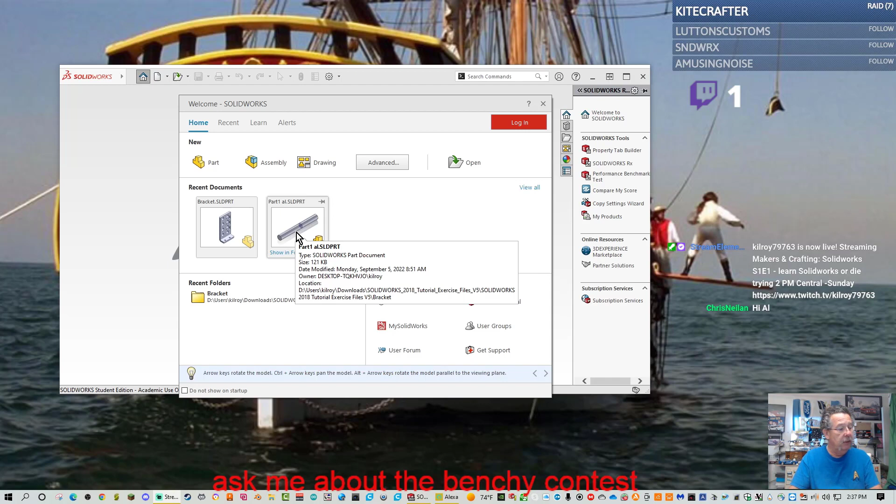So basically, we're going to figure out how to use SolidWorks. The first thing I have to do is type SolidWorks in the search window. Now I've got this one up, so I'm going to close it. I have a shortcut down in the taskbar - let's see, where is it? Somewhere down in here. There it is. I have right here in the taskbar a shortcut to it. But it says to, I guess if we put SolidWorks in there - hey, look at that. Solid. Now I'm going to enter, and boom, boom, boom, it comes up. So here we are, that's the first part there.

I have a secondary drink also. No alcohol, none needed.

So once we do that, there comes the SolidWorks. So SolidWorks application basically is what it's calling it. The Home tab - let me maximize this. Oh no, it goes away.

Oh, where is it? Did it go away? Yes. No, there's Alexa - we gotta get rid of Alexa. Oh, Alexa went away. Interesting, let me try that again. Let me close this out.

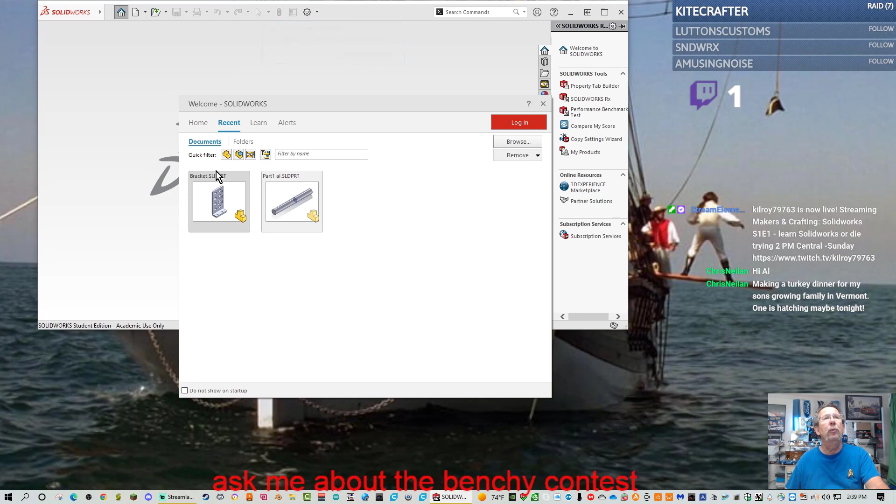Let's go ahead and open it back up, because that recent documents thing comes up, and I'm going to click on the advanced tab, which is what it's wanting me to do. So this is the home tab. It said click here, and then there's the recent tabs, which is what I've worked on - I messed around with the bracket and started the part. And then there's the Learn tab, which gives you a bunch of different introductions to SolidWorks, tutorials, my SolidWorks, etc. It's just some good information there.

Back at the home position, oh, and I guess there's an alerts section also here that gives different alerts for updates available, down August 16th, 15th. I believe I was told not to install these updates, so we're not going to install them. I'm going to close this out, do this, pin it.

So click new from the start menu. There's new right there, a new part. And do it there. If I click advanced, I think it shows it in a different way. And there we can actually go to templates and stuff, but where's new here? The templates, previews, I guess we could probably just go to new.

Oh, if we close it, we go back. Okay, see, we go to advanced and we go to the templates. We cancel it and we come back to this non-advanced. We are going to do a part, which is right here. So I'm just going to click on part. I'm going to do a new part.

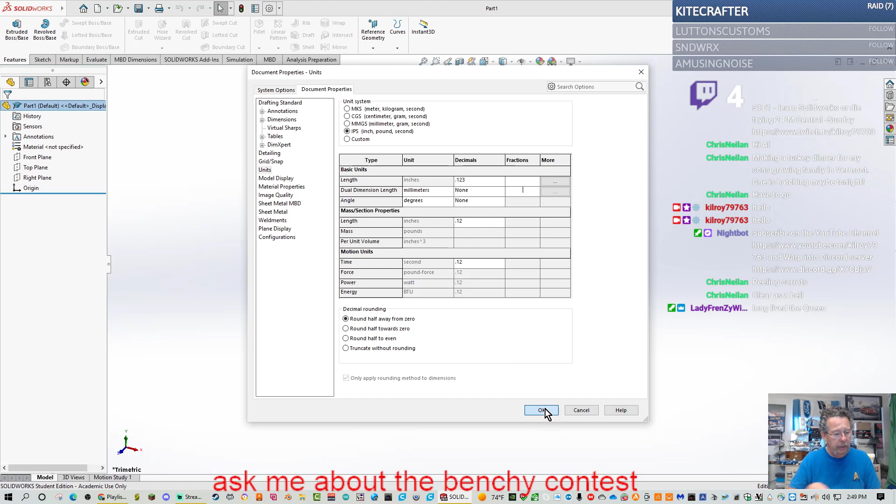Length basic, right, so select none for the angle decimal. Where's... oh, this one here says select none for angle decimal places. I'm going to select none on this. Okay, none, click OK from the document box. Okay, there we go, we're clicking OK. The parts feature manager is displayed. Parts feature manager, very good.

Create the base sketch for the extruded base feature. The base feature, to me, what they call a base feature in Fusion, I think they call it a sketch here because you got to click sketch. Anyway, it says to right click on the front plane, because if you go out here, see, there's the front plane, there's the top plane and the right plane. Those are the default planes. But it says to click on the front plane, so there we go.

I'm gonna make it a little bigger. I'm using the mouse to scroll it, and notice that if I go up here it moves down, if I go down here it moves up. I need it like... probably okay right there. All right, so that's kind of about how it looks in the book too.

So it says circle, let's see. The sketch tool is displayed, and it's wanting me to click sketch, which is... what is that? Too much buffering, really? Your phone?

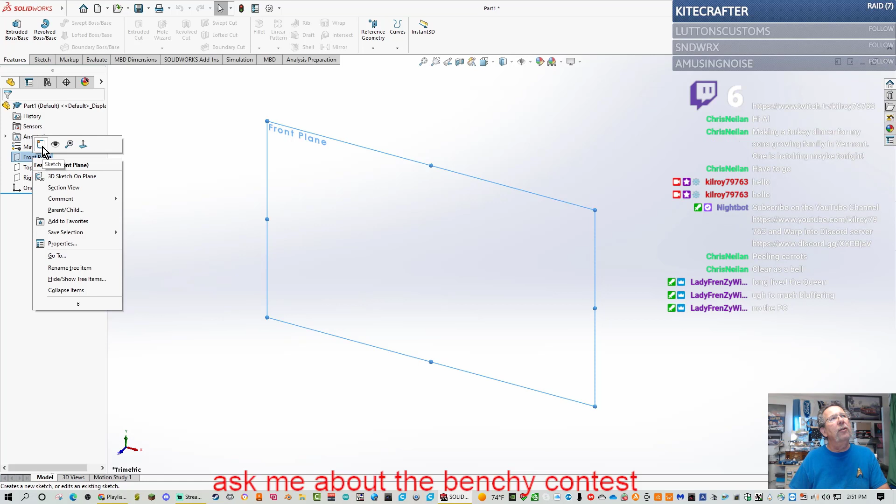So right here it says to right click and then go to sketch, which if you notice is right here. So when you right click, or when you select the plane, then you go straight to sketch there. There we go. Okay, so sketch on plane. Oh, it wants me to do the circle. Where's the circle now? There's the circle right up here, and it also comes down and says circle. So I have line, circle, line, rectangle, center point arc, ellipse, also text.

That's interesting, straight slot, and actually I like that.

Polygon and fillet, which rounds the corners, and then a point. So let's do circle, and drag the mouse pointer to the graphics window, which is over here. Then the cursor displays. You basically have a pencil, like draw and a circle.

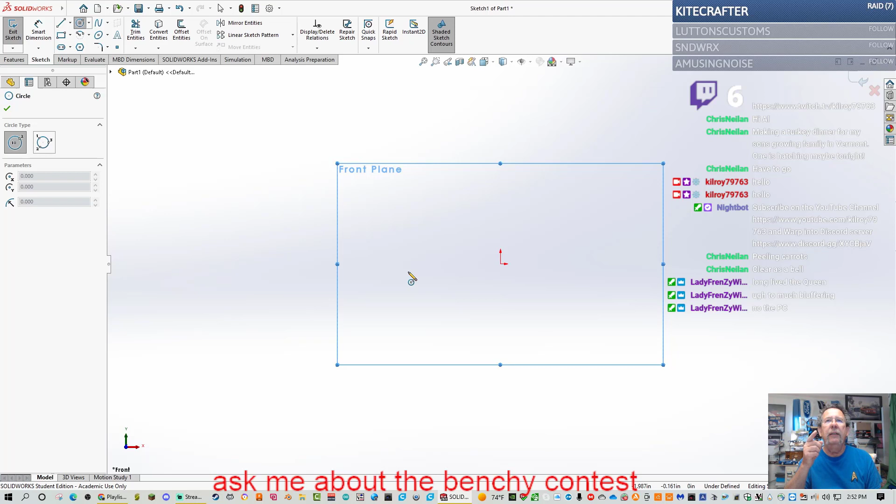So now I'm going to click the origin of the circle, and I'm not really understanding here. Drag the mouse pointer into the graphic window. The cursor displays the icon. Click the origin—it says the origin of the circle, but I don't have a circle yet. The cursor displays the coincident to point feedback symbol. I think what it wants is this.

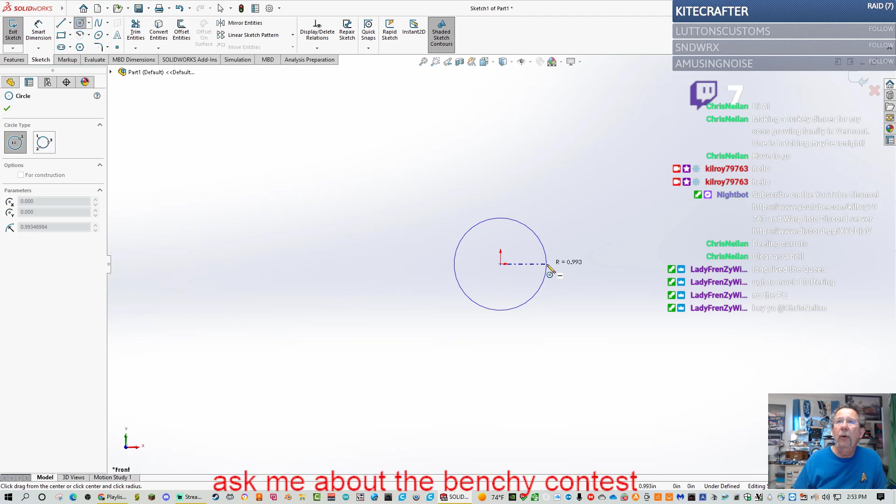Drag the mouse pointer to the right of the origin. I guess this is the origin here. It's not the origin of the circle, though—the origin creates the circle illustrated. Center point of the circle is positioned at the origin. Okay, somehow I just got confused there. It does show the origin, which looks like that.

So drag the mouse pointer to the origin, click the position to create the circle. The activated circle is displayed in blue. So if I click it, okay, the activated circle—I can just click it. We're good there. We have an activated circle.

It says add a dimension using the Smart Dimension tool. And the Smart Dimension tool, since I don't know where it's at, is up there somewhere. Let's see, where did it put it? Click Smart Dimension from the Sketch toolbar. Where is the Sketch toolbar? Oh look, I don't find the sketch toolbar, but I'm half blind.

I'm probably going to have to clean these up. Sketch toolbar—oh boy, where is this? Sketch—there's the sketch toolbar. There is Smart Dimension. There is the sketch toolbar.

So from cursor, click the circumference of the circle. So now I clicked it, and I'm going to click the circumference of the circle. That's diameter, so I guess this is the circumference, right? Circumference is the whole thing. So now where was I?

We put a dimension there, and it wants... yeah, that's why I said that. But see, radius is from here to here. Diameter is the outside—that's why when I click on diameter, look, it gives me the diameter, right? So before I get too carried away, click the circumference of the circle.

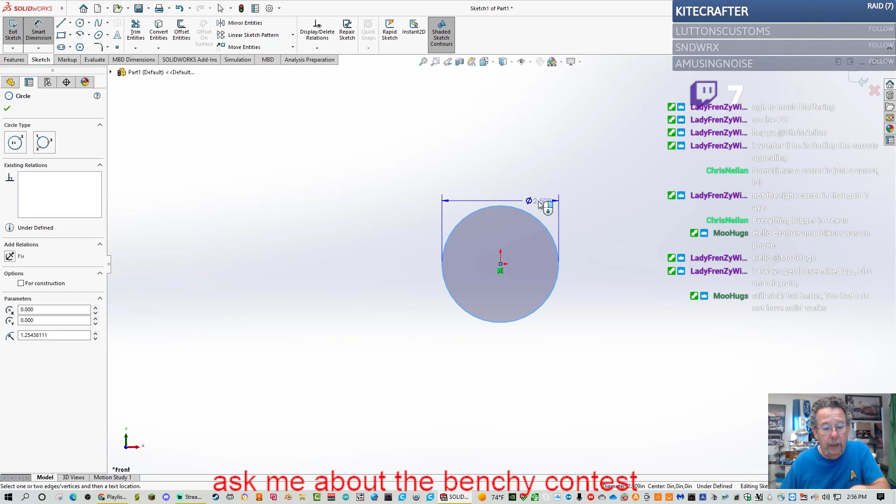It's $60, no, 60 or 99 bucks a year, I think. I don't remember exactly—of course I got this with the course, but that's one of the reasons I didn't use it. I think it's actually going to be better than Fusion, it seems to have a better, or less of, a learning curve.

Right now I'm just going through a lesson to learn how to use it and bringing up some of the features. So figured, what the heck, it's content.

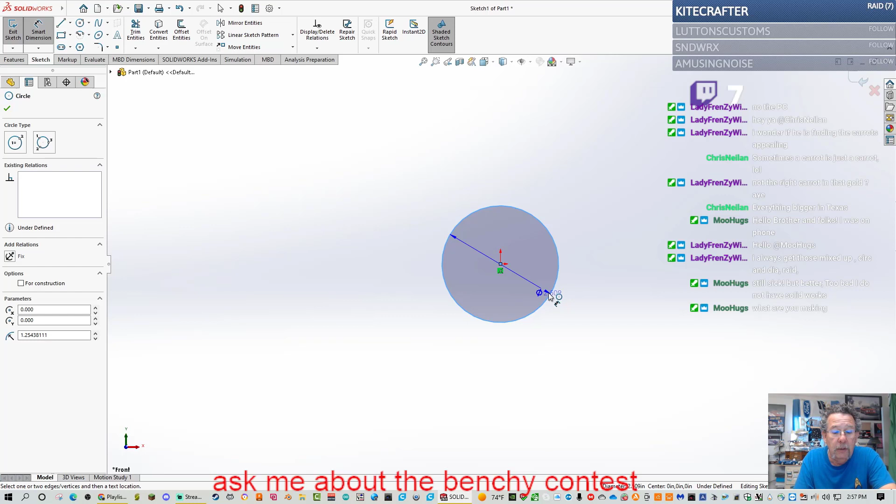So let me get back on track. Okay, I'm going to click the position diagonally above the circle in the graphics window, and I did. I'm going to click the position right there, and then drag it out. But why does it have the diameter? Is that what it's going to do? I thought, yeah, I guess so.

So click the position diagonally above the circle, enter 0.188 in the modify dialog box. Note the dimensions—where is the modify dialog box? Where is that at? Learn SolidWorks or die trying. No holes, exactly.

So I'm kind of sitting there going, I need to redimension this. There's a circle, there's the parameters. There's 1.25, 2.50. I wonder if this—yeah, this is. Check this out over here. This is a radius, see, it's like from the center point out, which is kind of interesting.

So that would change it, but here is where I don't know where this modify... again, oh there it is. Now what did I do? It says 0.188. Now see, this is inches, yeah that's right. 0.188.

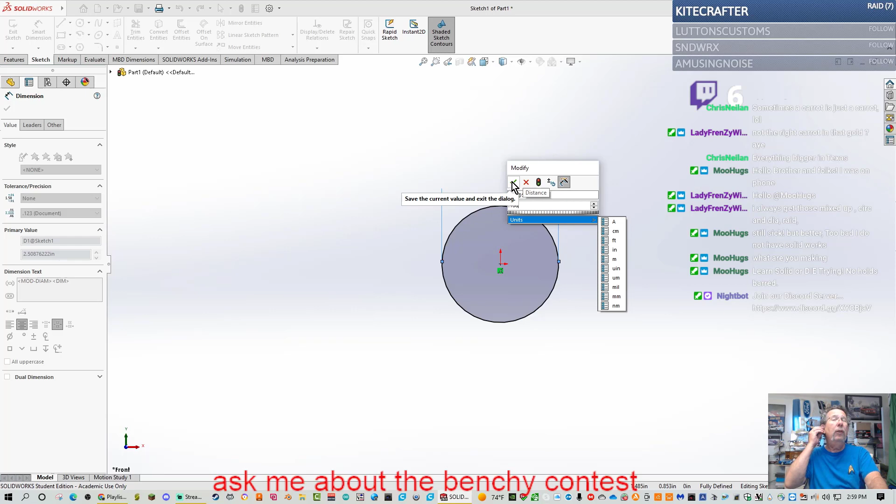Here, this is where I would need to enter 0.188. And then I guess units—there's units, these 0.18. Oh, I click the green check mark. That's one thing in this program that you do a lot: you click the green check mark to tell it, yay. Now this is still like this.

This is weird, the way it looks. If I go here, does it make this dimension driven off? Let's just cancel this—I'm going off script. That does not look right.

The circular sketch is centered at the origin. Press the F key to fit the part document to the graphics window. Right now it's centered in the origin, but if I hit F, it fits it to the screen, which is cool. And I have it highlighted.

Add relations and then dimensions. This keeps the user from having too many unnecessary dimensions. This also helps to show the design intent of the model. Dimension what geometry you intend to modify or adjust.

So primary units is IPS, which again is inch pound second. The secondary units is mmgs. So when you create a new part or assembly, the three default planes are the front, the right, and the top.

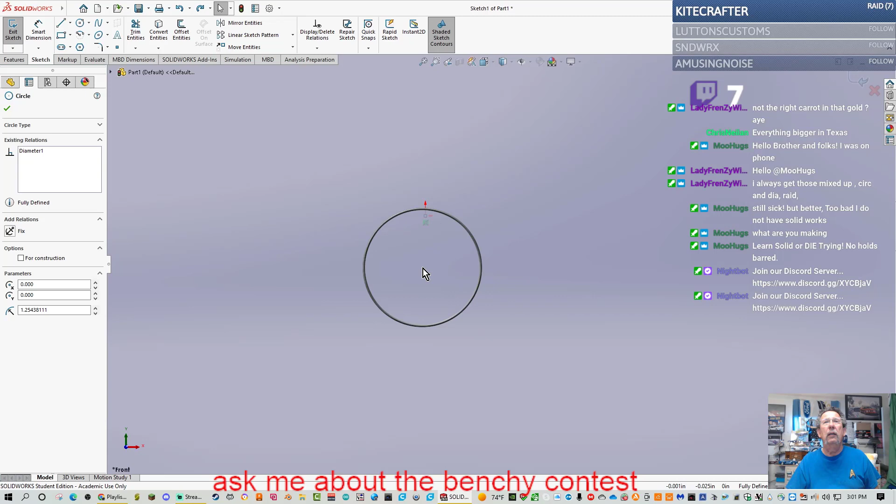This doesn't look like what's here, so I need to figure this out. I think I need to just go Control Z. Okay, so we're way out there. Hit this again. Oh, I'm hitting F, D4.

Let's go back to the mission. So click the smart dimension. I think this is what I did, guys. I didn't go down to the one that shows - which one is it? I did horizontal dimensions, vertical dimensions, dimensions. It doesn't say smart dimensions. Yeah, it does, but where's smart dimension? Ah, vertical, base, horizontal. Where is smart dimension? Oh no, that's what I just clicked.

Click smart dimension, the current display. So all I've got to do is just do that, and it displays this. Just did it a second ago. That one went there.

Click circumference of the circle. Oh, there it is. And then click the position diagonally above there. It doesn't really show this so much. Auto insert dimensions - here, this one's the one we're trying to do the smart dimension on. See, it's doing it weird.

It is mentholatum, let me give you a shot. See? There you go. All natural ingredients, smooth and coat, topical analgesic rub. And really what I used it for, or what I started using it for, was because I had a little cut mark right there at the tip of my nose, and I needed something to wipe my face. Nothing like a red shop towel.

So I'm just wondering, D1 at Sketch, you know, since this one's driven up here, and for some reason I don't think box selection... I don't see how to delete it. Let's select more dimension. Gives more dimensions. Redraw. Well, what I'm saying is that maybe if I get this one...

Oh, check this out, I bet - well, maybe not, no. If I right click on it, box selection mode - how do we select more dimensions? Pick entities, redraw. I click that. Because this is wrong - this is 2.509 and it's supposed to be 0.188.

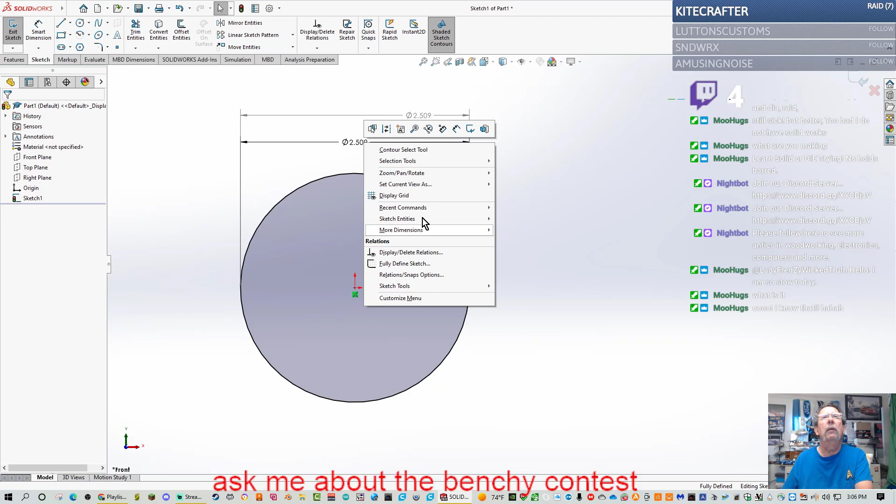Selection, display grid - very interesting. And I followed it just like I said. Enter the modify - note that the dimension modify. I don't see modify now. See, modify - what's something else that...

Let me look at this real quick. Tool, display, recent commands, display, delete - here's delete, let's do a delete. What I wanted, okay, do this. And let's delete this one too. I'm just right clicking on it.

So we're back to this - this is the coincident point of the origin with that. So coincident means that they're the same, or they coincide with each other. I'm sorry, they're not the same, but they're at the same point - the center of the circle and the origin.

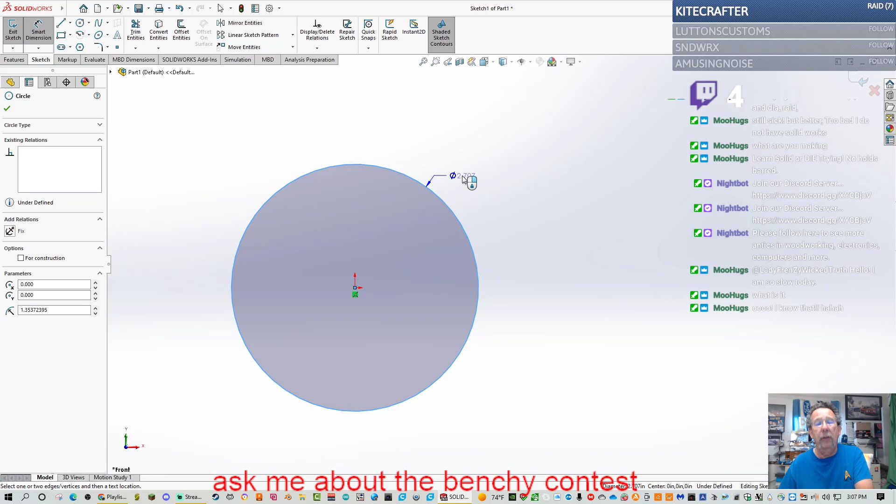Let's do this again. Let's go up here to Smart Dimensions. It has me point to that, and it has a little circle like that, identically, and when I click it, it goes like that, which I'm good with. If I right click... oh, I see why it moved. Okay, if I right click, I lock it. If I left click, it unlocks it.

And then that's when I get the D1 at sketch, and here's where I need to put the 0.188 units. The units come up, click the green mark. It doesn't say anything about units. The dimension locks down - click modify units. Oh, wait.

The dimension modify dialog box provides the ability to select a unit drop-down menu to directly modify units in a sketch or feature from the document properties. But it doesn't say anything about that.

Or does it? Click the green check mark in the modify dialog box. The diameter of the circle is 0.188 inches. So let's make sure we have inches, which is right there. Now let's go up and pick the X. Now it says point. There it is.

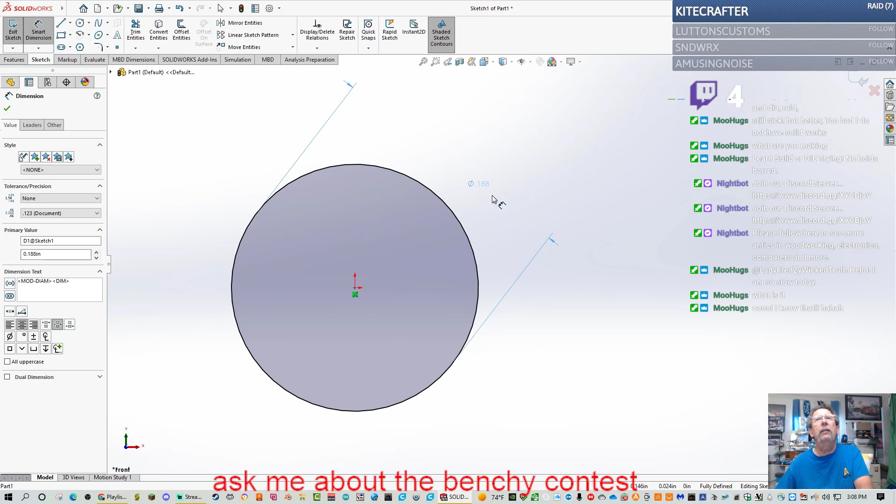Kind of weird, yes, it doesn't look like that. Move this thing. Cool that you can move it around like that. Okay, so the F key fits it, which is weird.

Press the F key to fit the part document. Interesting. Here it goes, it went whoop. So add relations, then dimension. This keeps the user from having too many unnecessary dimensions. This also helps to show the design intent of the model.

Primary units is IPS. The optional secondary units are provided in MMGS, but it's not provided in MMGS. I'm not certain why. I see units or more dimensions, so no, that goes to more dimensions.

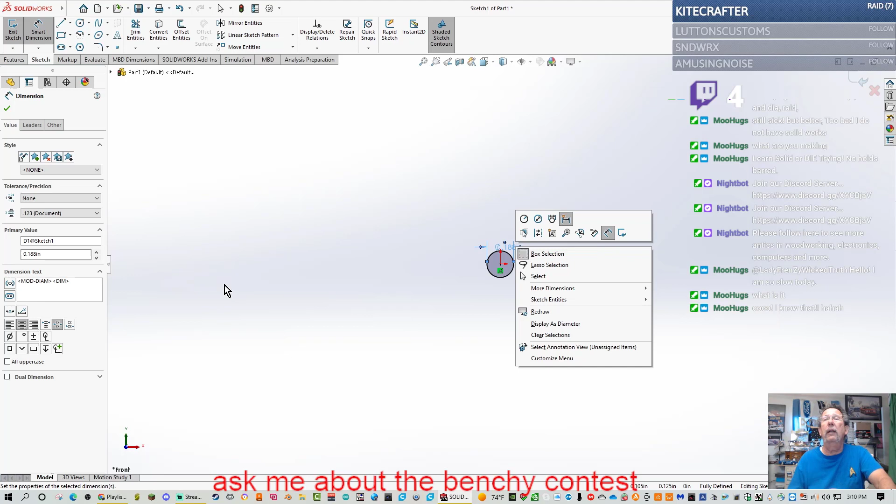All right, so extrude the sketch to create the base feature. Click the Features tab from the command. It is right there, there's our Features tab. Click the Extruded Boss Base Features tool.

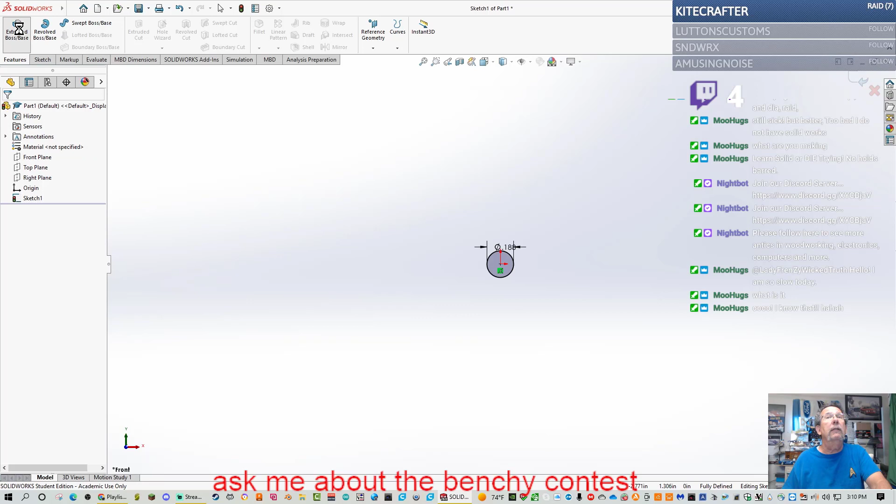The Boss Extrude Property Manager is displayed. Blind is the default end condition in direction 1. What does that mean? Okay, so extrude boss, right? Here we go, oh, check it out. Select midplane. Oh, where's midplane? Oh, blind. Blind is the direction, okay, that's what they're saying.

Blind is the direction. Click the Features tab, command, extrude features. Blind is so select midplane or endplane in direction one. So in direction one, see this is direction one, direction two, and then a thin feature. But at this point, what it wants us to do is go

midplane, so midplane is there. And what it does is it splits it so that when you pull it, I think it pulls... I remember the word, but it pulls equally in both ends, so it's mirrored or anyway, um, yeah, and that's what I just said.

Enter 1.375, comma 3493 for depth. Let's go here. Yeah, 1.375, and I think I could just... and then space, no, comma. Anyway, space, open box, 34.93, close box, not close box, but close square brackets.

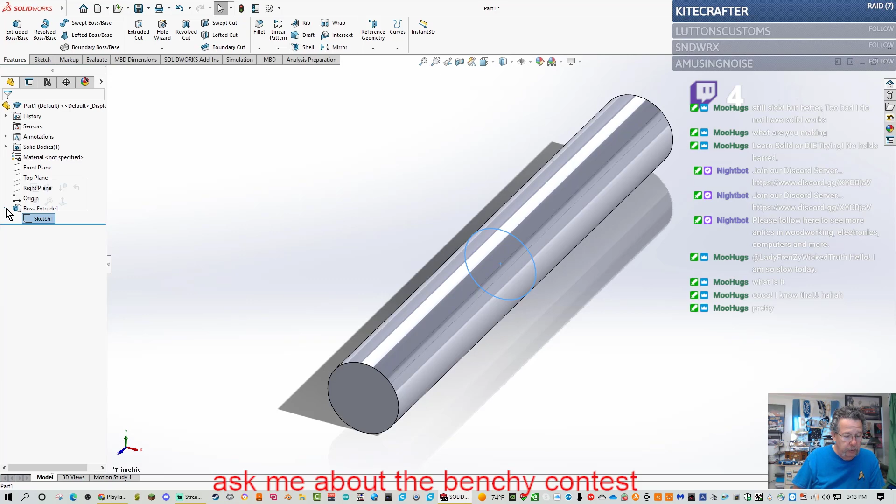Display an isometric view of the model. Press the space bar. So if we press the space bar, it shows us the orientation dialog box. And we're going to click isometric view, which is this. No, it was that one. See right there? That's what it wants. And that's what we have, a trimetric.

This over here is still showing hidden lines removed. Hidden lines visible, there's our hidden line. See how it showed it right there now? That's pretty neat.

And then this one, which is like a wireframe. So you really have, I think what it's wanting is the isometric view, that's shaded with edges. I think they might have changed that.

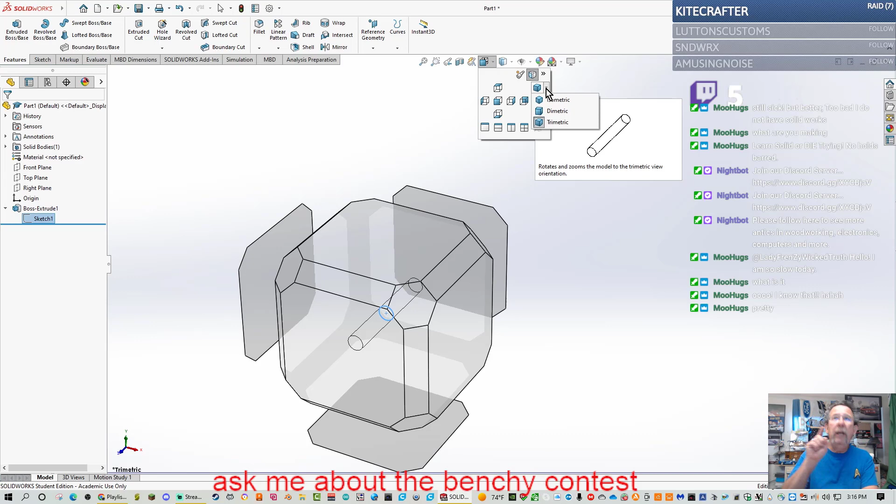Here's trimetric, or just click the isometric icon. The boss extruded name is displayed in the feature here. So we got isometric, dimetric, and trimetric. So it wants us to do the isometric. That's what it wants right there, even though that's not what it's showing right now either.

Click Save As from the drop-down menu. Now I was told it would be a really good idea to save to a thumb drive for later use. I'm going to have to do some calisthenics, get up underneath and plug it in the back because the front is full. So I'll be right back.

Whew! Man, I tell you. Well, I plugged in the thumb drive and lost the camera, but that's okay. I got it back. Make sure now that I can see the thumb drive.

I think that's it. All right, so let's see if I can save to you. So it says to save. I wonder if I do a Control S, but I don't know where it's saving to. So I'm going to do a Save As. I'm going to click there. There we go, so if you go up here to the floppy.

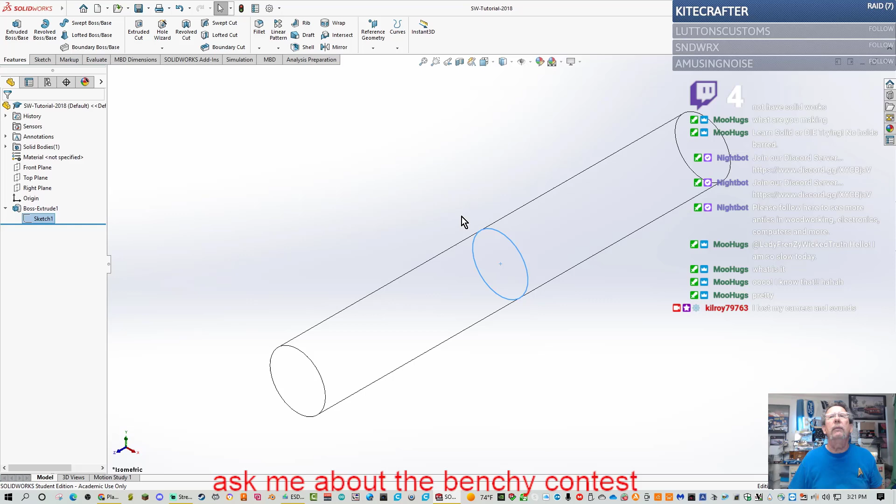Which means that I should have done it here, right? Back to that - I think that's how I should have saved it. So if I save it again, see, Control S is also save, so I'm just going to Control S and save it because that's what I'm seeing in the book, right? I'm sure that that's what it needs. Oh no, and it actually said to save it this way.

Save as, and then to make a folder, so I'm going to create a new folder. Yeah, that's what it said. Oh, I see, I named the part that - see the part right there? Now here's a little trick, guys. No, don't do that, don't do that. Here's a little trick - you click right there, you go into change the name, I guess, or rename. But you can copy that. And since I'm wanting to make - cancel it again because I just copied that name.

But if I go to File, Save As, now I can go up here and go New Folder, and I want to name the new folder that right there. And folder, double click on SW tutorial - I've already named it as that. The file name needs to be Axle. So what it's wanting to do is put it in that directory or folder and call it Axle. Is what it's doing - Axle. Oh, Axle. And then for the description, I don't see the description.

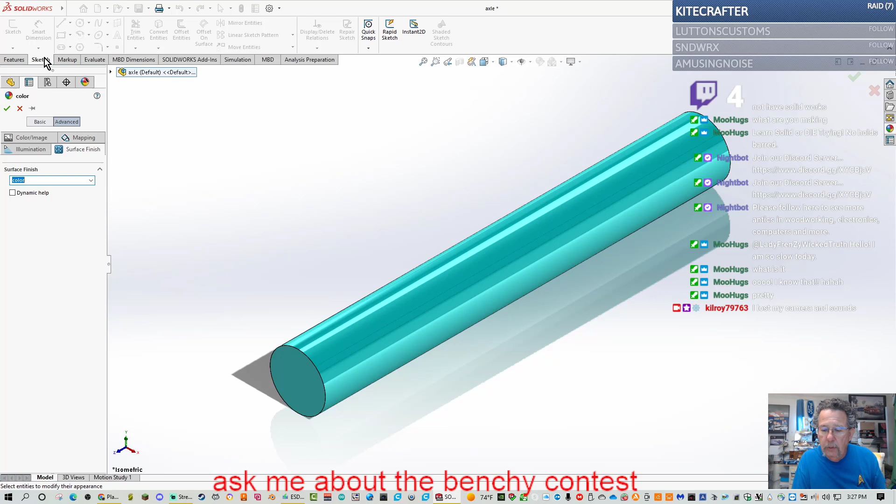Hello, Paul's Messai Workshop. How you doing, Paul?

A fully defined sketch has complete information, manufacturing and specifications or inspection, and is displayed in black.

I guess it's over there somewhere. Who knows? Because I just got lost. The Sketch Expert Property Manager sketch.

I think this is more informational at this point. Sketch Expert Property Manager provides the ability to diagnose an overdefined sketch to create a fully defined sketch. If you have an overdefined sketch, click Overdefined.

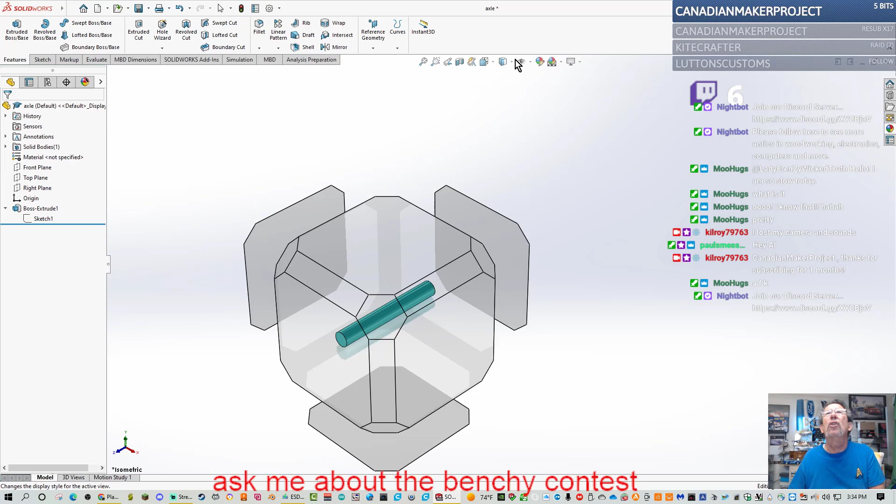Click the hide show origins from the menu bar. Hide show origins. Now let's go over here. Oops, no, this one. This one here. View orientation. And it's saying to go show the hide.

Front view, yeah, that's what I just did. That's exactly what it wanted. So let's put it on the isometric view now, which is I think everything, which is this one here. We go here and you can see it says isometric. There's isometric. So we're back in isometric view.

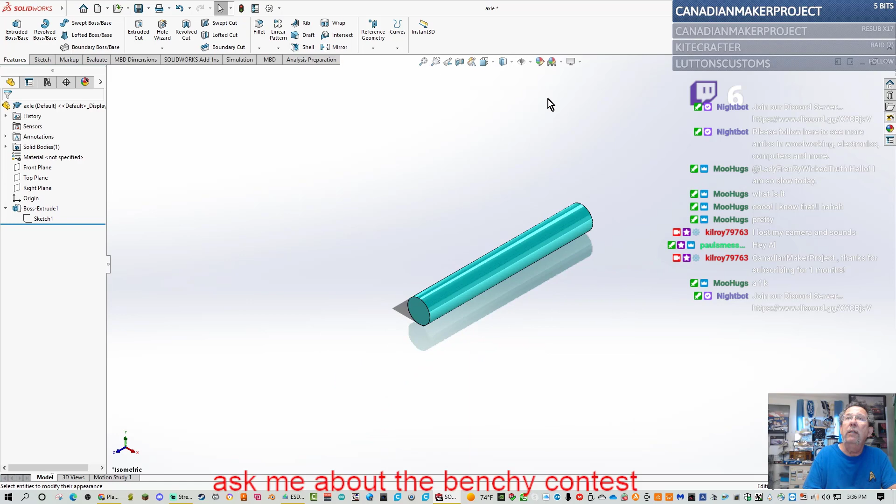So view the model. You can manipulate the model in the graphic window. You can press the lowercase z to zoom out, and you can press capital Z to zoom in too. So if I do Z Z Z Z Z, I go out, and then Z Z Z capital Z Z Z, I go in, which is kind of neat.

View the available tools in the graphic window. Right-click on the graphics window, select the available toolbar. So I can actually click here, and that toolbar is what it's telling us to do.

Project. First, I'm going to build it. Okay, well, that's the first step.

Click the middle mouse button, which is this. It's actually my mouse wheel. And look, there's an optical illusion right there, guys. I don't know if you can see that, but it looks like this part is smaller than that right there, and it's not.

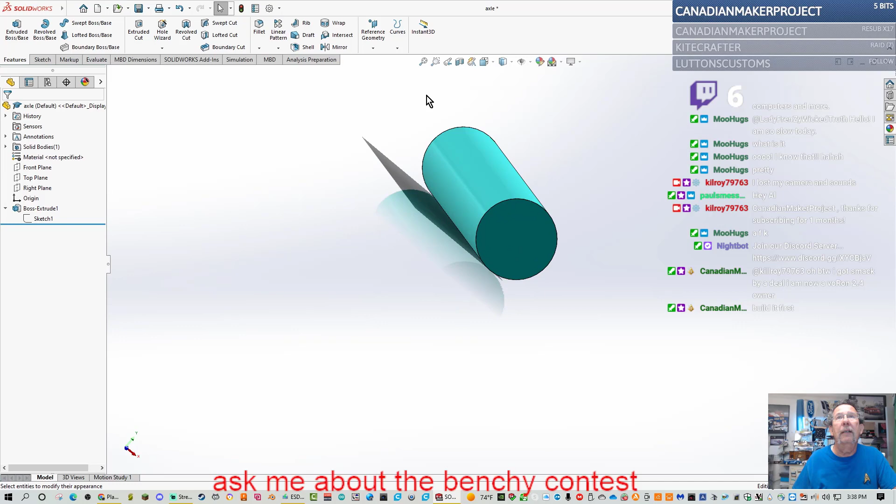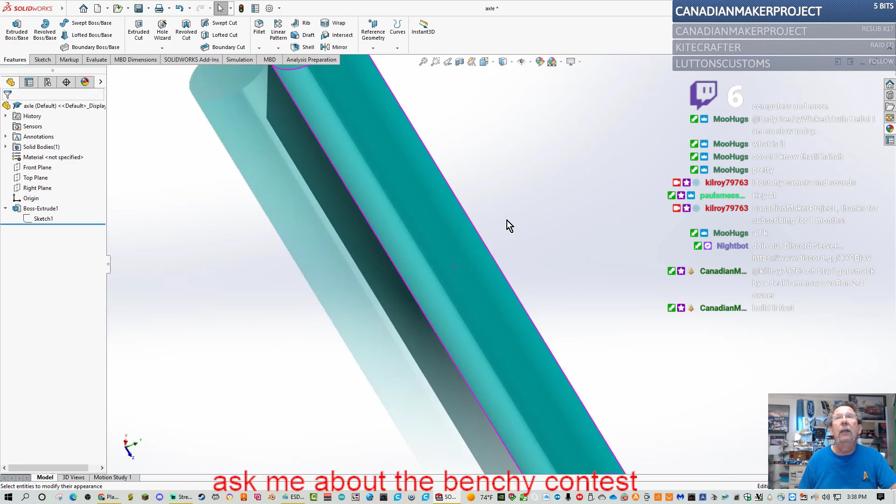So that middle mouse button, F, gets this out, right? So press the up arrow on your keyboard. Oh, look, and it rotates that way too. Here's the left and the right. Woo, woo, woo. That is cool. That is cool.

So the arrows do that, and it does it in 15-degree increments. So up arrow. I'm basically taking notes, right? 15-degree increments. View modes remain active until deactivated from the view toolbar or unchecked from the pop. Yeah, right. So if I hit F, it goes back out, so click isometric view from the heads up.

So let's click isometric view, the heads up. There we go. Isometric. There we go. Click the drop-down arrow in the display styles.

Where is display styles? Oh, I see the drop-down arrow. That display, there is display style. So what it's saying is click this little arrow, and the shaded displays are shaded view of the model.

The shaded with edges displays the shaded view of the models with edges. The hidden lines removes, yeah, I think we went over this before, removes only the model edges that can be seen, and then the hidden lines visible displays the edges and the hidden lines. Wireframe, of course, is a wireframe.

So return to shaded with edges, which I think is this shaded with edges. There we go. Where we're at. And then click save. The axle part is complete. Let's just click save.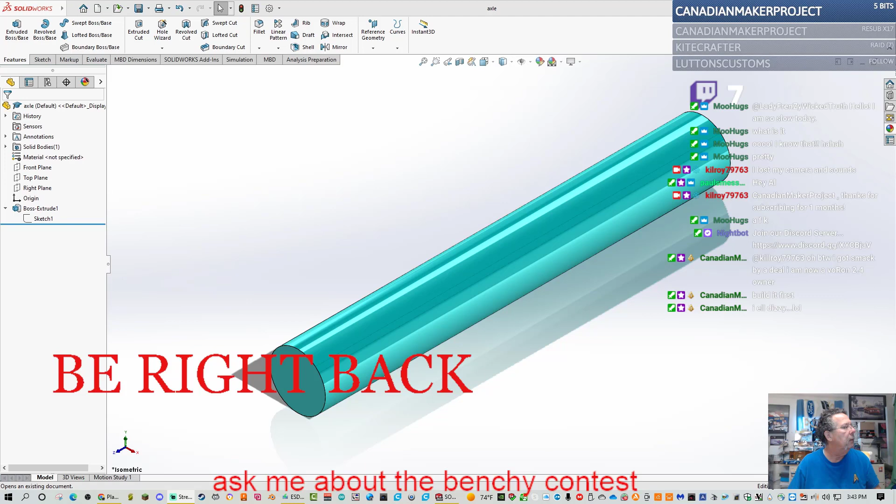Okay, we are back. All right, so now we're going to do the shaft collar part.

The shaft collar part is a hardened steel ring fastened to the axle part. Two shaft collar parts are used to position the two flat bar parts on the axle. What this will be is something like this. Anyway, I'll show you later as we get better. We're just going to do a donut thing, basically a circle with a hole in the center, that's all it is.

So, not to dwell on everything, let's go ahead and click New from the menu bar, which is this piece of paper looking thing. From the menu bar, click the Templates tab.

Oh, but we're going to have to be in advanced, right? Templates tab is right there. Part is the default template from SolidWorks. Double click Part. Right, so there we go.

So the part's feature manager is displayed. Voila. Click Save As in the drop down menu. So, File,

Save As, enter shaft collar for the file name, in the tutorial folder. Call it shaft-collar, shaft, dash, right? Click Save.

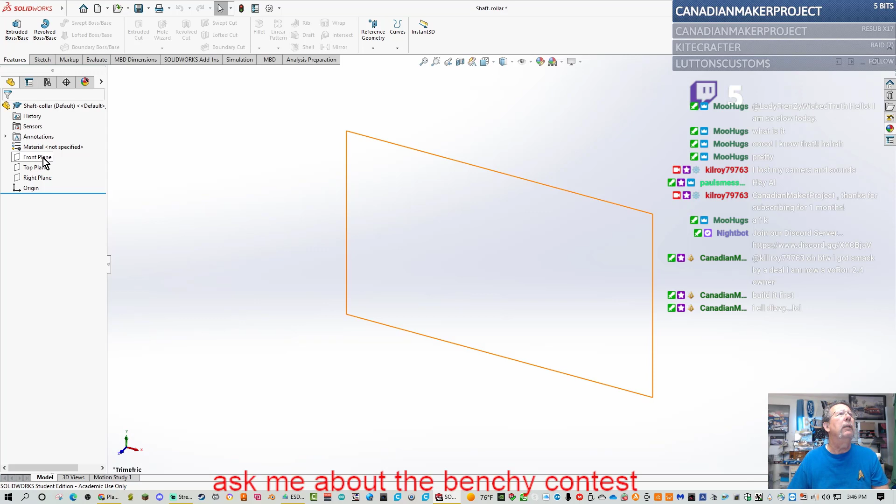Okay, so insert a new sketch from the extruded base feature. Click sketch from the context menu. Right click on the front plane. Oh, the front plane, yeah, that's why it wasn't there. Okay, so there we go on the front plane, and then it says click the sketch, which is right here.

Okay, so click circle in the tool box, which is right here. As we do that, we have a choice of a perimeter circle or just a regular circle. Regular circle is what it wants. Click the origin, which is right there, and it displays the coincident point feedback symbol.

Drag the mouse to the right of the origin as illustrated, to the right. Click a position to create a circle.

Click Smart Dimensions, which is there, I just can't see it, from the sketch toolbar, right there. Okay, from the sketch toolbar, click the circumference of the circle. The cursor displays the diameter feedback symbol for feedback.

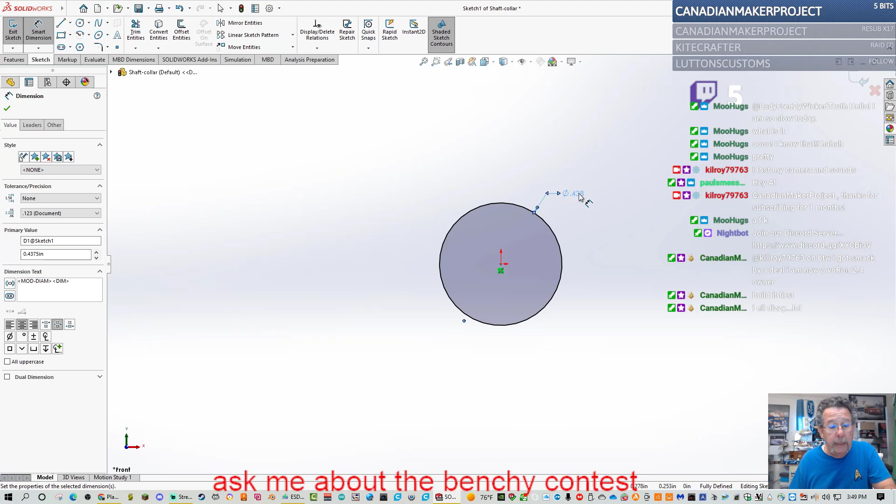Okay, now extrude the sketch to create a base feature. Click the Features tab, there we go. Click the Extrude Boss Base. Select mid plane for the end condition, so mid plane is what it is.

End condition in direction 1, yeah, mid plane end condition in 1. Enter a quarter of an inch, 0.250, right here. I wonder if it defaults for depth, and accept the default.

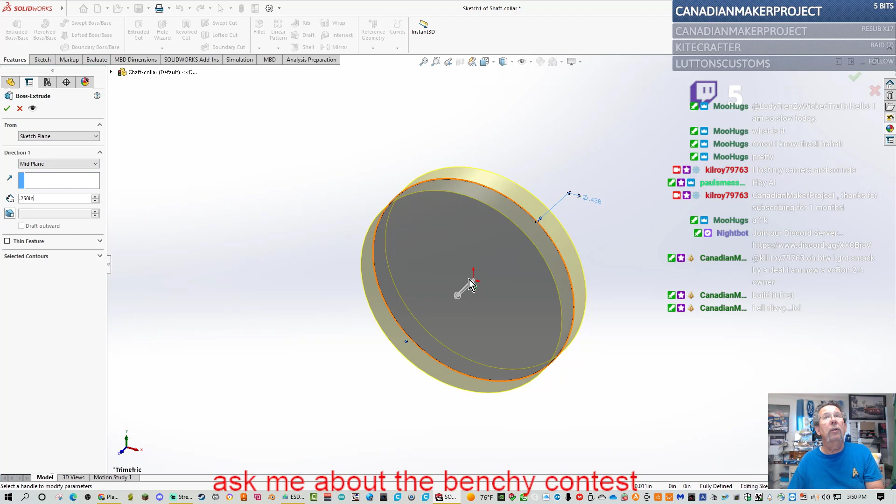Default conditions. View the location of the origin. Click OK. Here's the origin, and there's the quarter inch. Select that, press the F key. There we go, that's as big as it'll go.

Click trimetric from the heads up, so trimetric right here, we can go there. Oh, wait.

Hold up a sec. Oh, from there. Trimetric. There's trimetric. Okay, trimetric is there.

Click save the model. Click save.

Okay, so now insert a new sketch for the extruded cut feature. We're going to extrude another sketch. It says right click the front circular face of the boss. So let's go right click that. Right click on the front circular face of the Boss-Extrude1 feature for the sketch plane. Mouse pointer displays the face feedback icon.

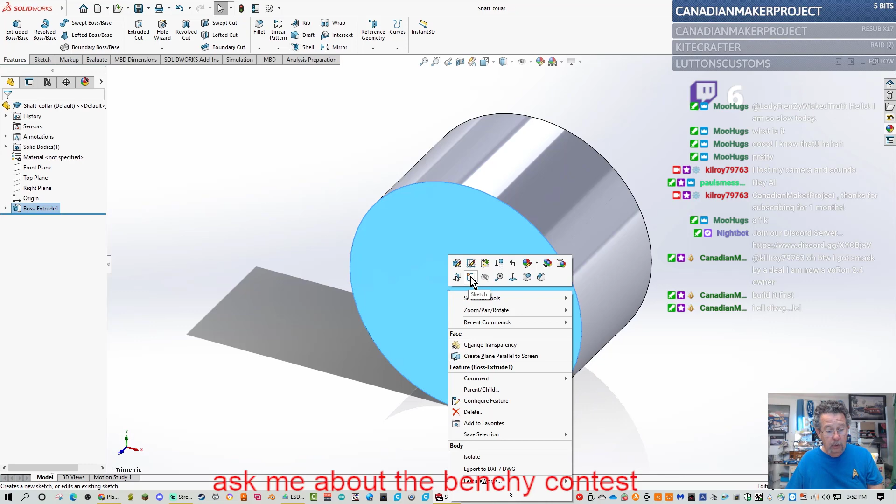It does, right? Which is all that you're seeing there. Click the sketch right here. From the context toolbar, as illustrated, the sketch toolbar is displayed. Okay, this is your sketch plane, and the sketch toolbar is displayed.

View the mouse pointer feedback icon for the correct geometry line. So wherever the mouse is, mouse pointer feedback icon. That's that here, or what?

But anyway, all right, the next thing is click hidden lines removed from the heads up view. From the heads up, that's right here, and that's right here. No, actually that's from right there. Lines visible, wireframe, lines removed. There's the lines removed.

Okay, click the circle tool from the sketch toolbar. The circle tool, which is this one. From the sketch toolbar, the circle property manager is displayed.

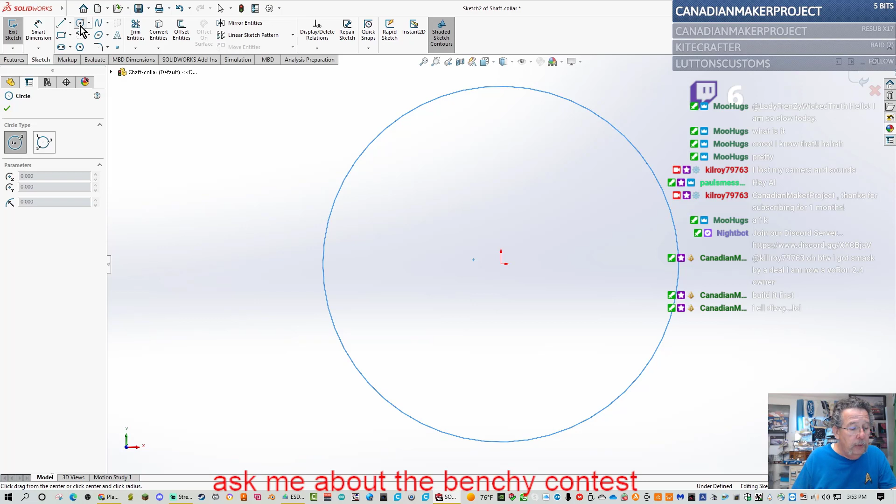Click the red origin, which is right here. See that? Why is that over there? Interesting. Looks like it's center, right, guys? So cursor displays a coincident point feedback.

Drag the mouse pointer to the right of the origin. Not going to go very far. Click the position to create the circle as illustrated, like that.

Okay, click the Smart Dimension icon tool, which is right here. Click the circumference of the circle. The circumference, again, is that there.

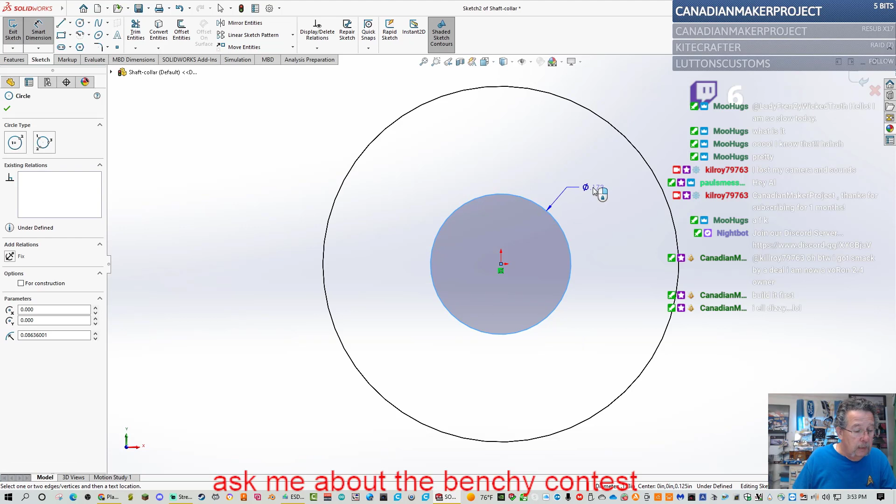Click position diagonal above the graphics window. There we go. Enter point 190 in the modified dialog box. Click the green check. Oh, okay, so there it is.

So insert an extruded cut feature. Click the Features tab from the command menu. Features, which is here. Click Extruded Cut. Extruded Cut is right there.

Select Through All. Where's Through All? Okay, in direction 1, Through All. See, that'll cut a hole right through the thing, right? Click OK.

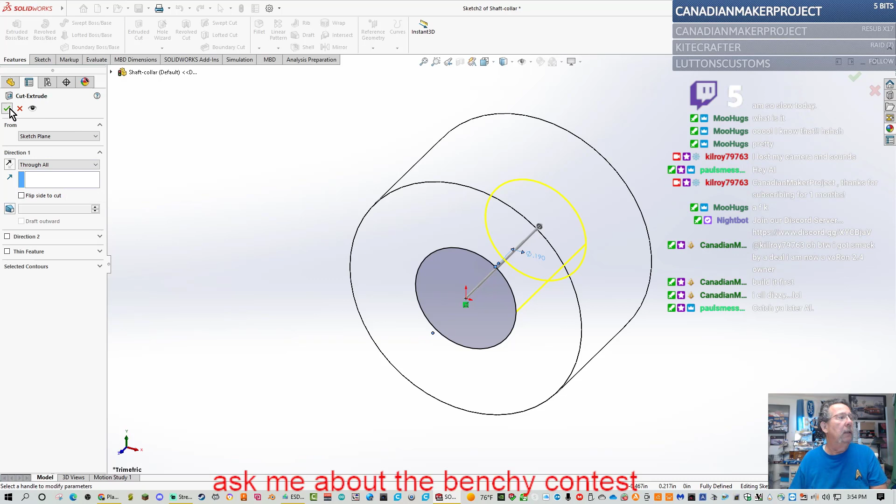See you later, Paul. Have a great evening and enjoy the rest of your weekend, Paul. Thank you for stopping by. I still have a little more homework, Paul, but it's all good. I'm probably not that far from finishing, but in any case I have to finish because this is due tomorrow. So, being a teacher myself, I know I better turn my homework in. That's all I gotta say. Anyway, this is going to be a good program, I think. Anyway, live long and prosper. See you later, Paul.

So we're there. Double click the... so let's see, click Z. Okay, so click Z, and that puts it somewhere, right?

Procrastinate, yes, yes. Actually it's been a busy weekend. We've been trying to install this stuff on campus, the software for Solidworks, and I got it installed here at home actually, and tried to install it on a laptop. It wouldn't install, so I just said this is going to be the next series. Who knows, I may even move this over to YouTube. But anyway, for right now it's on Twitch.

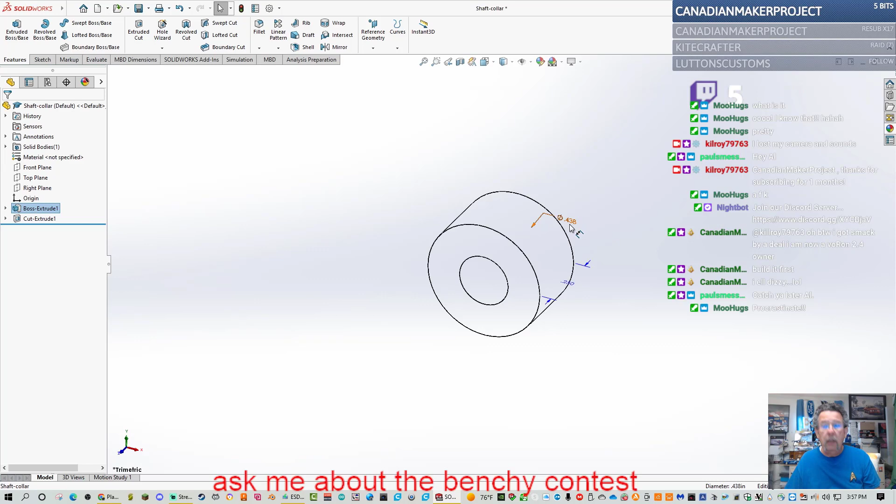Does it say 2.50? It says .438 actually. Oh, there's a 2.50, there it is. It is right there, there we go. So now do 0.500 in.

Oh my goodness. 11 bits, thank you so much. Thanks, Ron, appreciate it man. Really do.

So 0.50. Okay, now click the rebuild from the menu. So where's rebuild? Where is rebuild from the menu? Oh, it's this, it's this. Regenerate the model with the current value. It's that, but it's not giving me any options. It just did it, right? Oh, Control B also does it. Oh, there's no options, so I could have done Control B or rebuild, which is what I did.

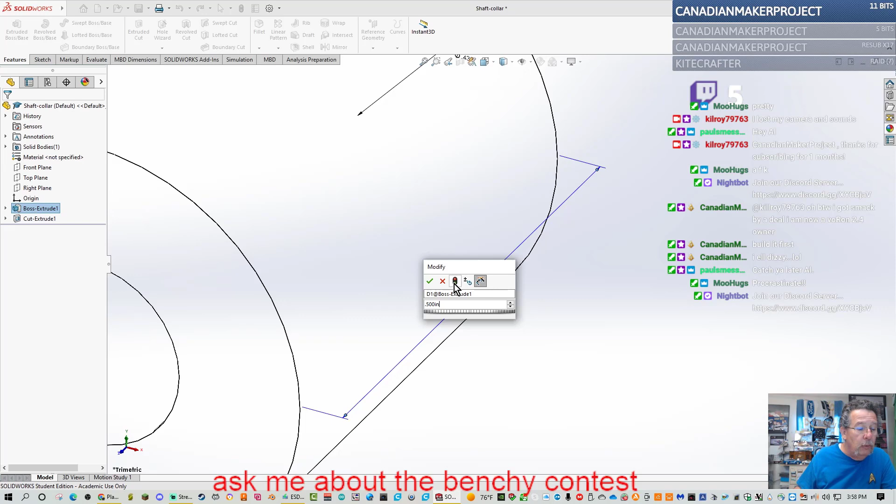So the boss extrude one features are modified. Click undo tool from the toolbar menu. Really, undo? Undo, which undo is where? Is that it, reset spin? No. I don't see undo anywhere. I mean, I could do Control Z.

Click undo from the toolbar menu. There is no undo, so restore the original value. So in this case, I think what it's saying is do undo, but there's not really an undo. Or is there? Could be the third one over. See right here? It's that one. So I guess if we get out of this, now we can go ahead and undo it, and it'll go back to the prior size.

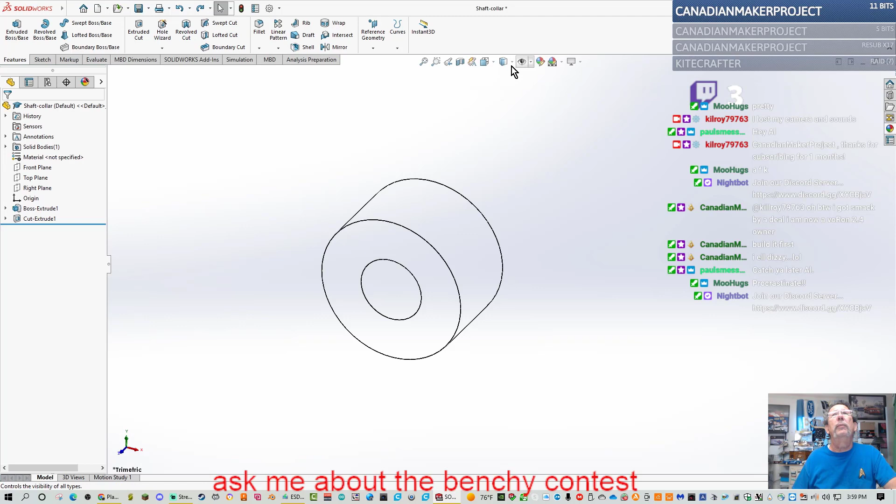All right, very good. So display shaded with edges. Click the shaded with edges now. Let's go up here, let's go to shaded with edges there, and look, we have that back.

So right click on the shaft collar part icon on the top of the feature manager. Click the appearance dropdown. So what it's saying is do that, go to appearance, and click the edit color box illustrated. Edit color boxes, so the color property manager is displayed. Shaft-collar is displayed, selection, click the basic tab. We're in the basic tab. Select the light green color, and it's pointing to the fourth one. 1, 2, 3, 4, right? So 3, there, that's what it's picking.

Okay, from the color bar, click OK, the property manager. Okay, save the shaft collar part. So I can do a Control S. That saves it. Or I can go up here to the floppy, and there it is. Okay, so both of those two are okay.

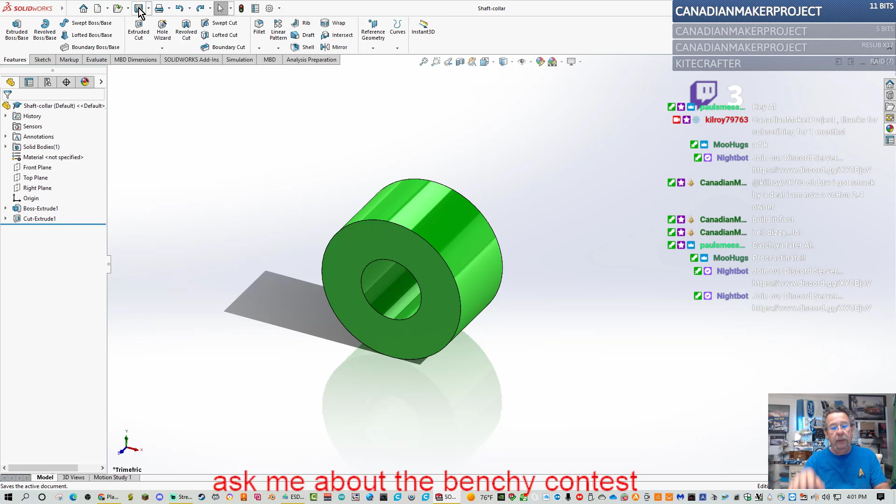So anyway, there's a review of the shaft collar and stuff, and basically it's just a circle that's been extruded with another circle in the center, and it's cut. So now we're going to do the flat bar. And the flat bar looks like this flat bar right there. So it'll be that right there that we're going to do. Okay, so let's do a flat bar.

And so the flat bar part fastens to the axle. It's 0.090 inches, it's 6061 alloy. So we're going to create the flat bar.

Create a new part, so we're going to click this white page to create a new part. There's the part, I could have go there. Part, click the templates tab, and that's what it is. I double click on part.

So save the part as. Now let's go ahead and save it as. File, save as, we're going to save it as flat bar. Flat bar. That's a bar that has no fizz in the soda pop. A flat bar.

Let's see, enter flat bar for the file name and the description. It wants us to put in the description. Add a description. It wants us to put flat bar 9 holes, flat bar 9 holes. All right, so next is

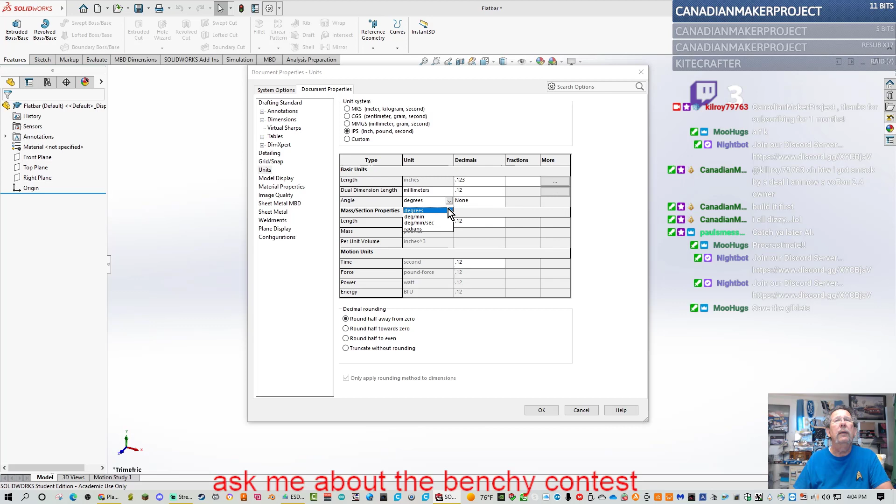So let's slow it down. We're there, so let's insert a new sketch. To add a new sketch, right click on the front plane, then click sketch.

Now utilize the consolidated slot sketch tool.

Watch, I am working on my new video. Cool, Rod. I don't know what that means. I am working on my new video. Gotcha, can't wait to see it. Something I'm going to do more of is more videos.

But anyway, so what it's saying is click the center point straight slot tool from the sketch toolbar. So if we go over here, right here, Maker project.

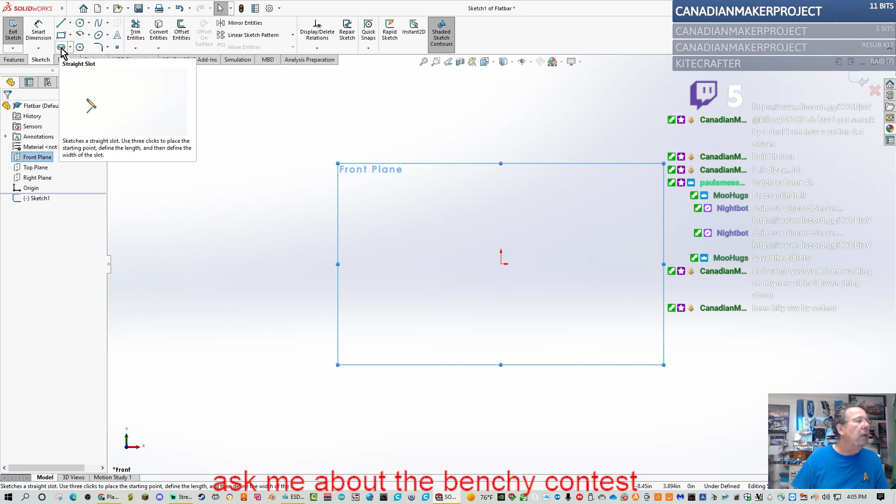Hiding by accident. Click the center point straight slot. So we do that there. Center point straight slot, okay, got that. All right, there we go.

Now create straight slot with 3 points. So click the origin. Oh dear, parameters, origin - the origin is right there.

Okay, click a point directly to the right of the origin. This is your second point, so let's put a second point there. Click a point directly to the second.

Oh, so it's saying click a point directly above. So really, above, above. Click a point directly to the right of the origin - this is your second point. Click a point directly above the second point - this is your third point. The straight slot is displayed.

See, that doesn't make sense. It's saying to do this. Yes, I guess that's what it said, right?

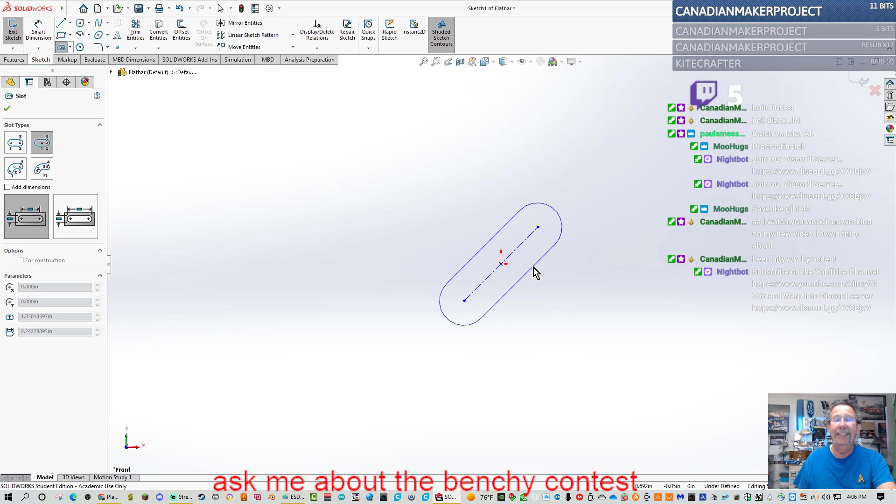Click OK from the properties. OK from the properties, project. I can't type today.

No worries whatsoever. Click View, Hide, Show, Sketch Relationships, which is on the menu bar. View, Hide, Show Relations.

View, Show, Hide - what does it look like? What is the check mark? Oh, View, Hide, Show - where is that? Okay, we got to back up here.

Control Z, okay, we're back on there. We're going to go all the way, start all the way back. View, hide, show, point directly.

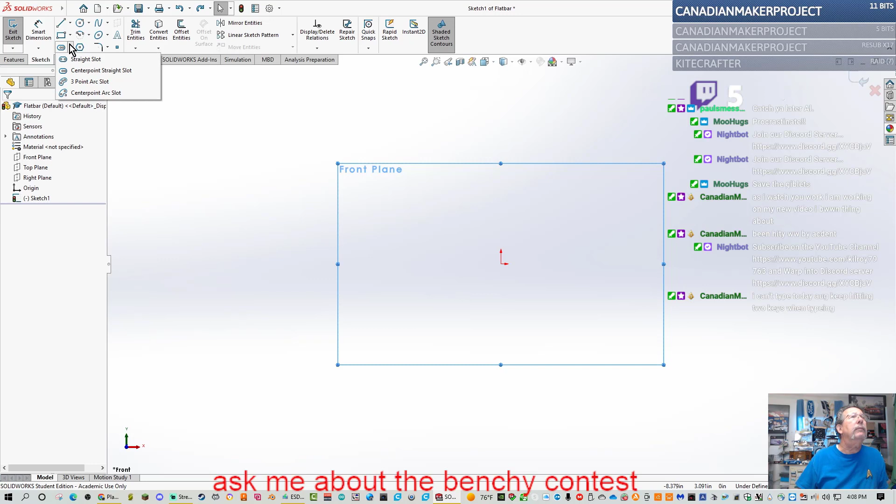So click origin - well, we don't know yet what we're doing, right? So click center point, excuse me, click center point straight slot.

Go, now click the origin. The origin has been clicked.

Click a point directly to the right. Here, and then click a point directly above the second point. Oh, right, there we go. Click OK for the property manager.

So now click View, Hide, Show, Sketch Relations. Know where this is at.

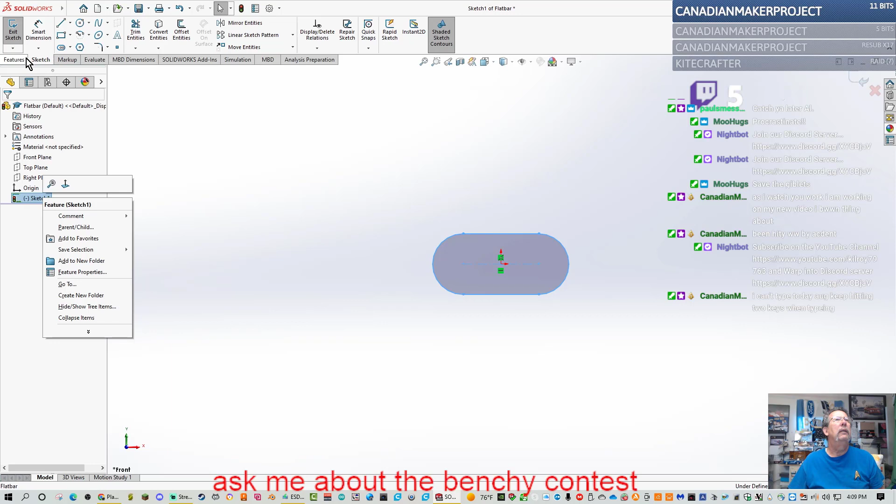Click View. Let's look at all. Hide, Show. Manager, Creation Manager. Markup, Evaluate MBD. Add in simulation.

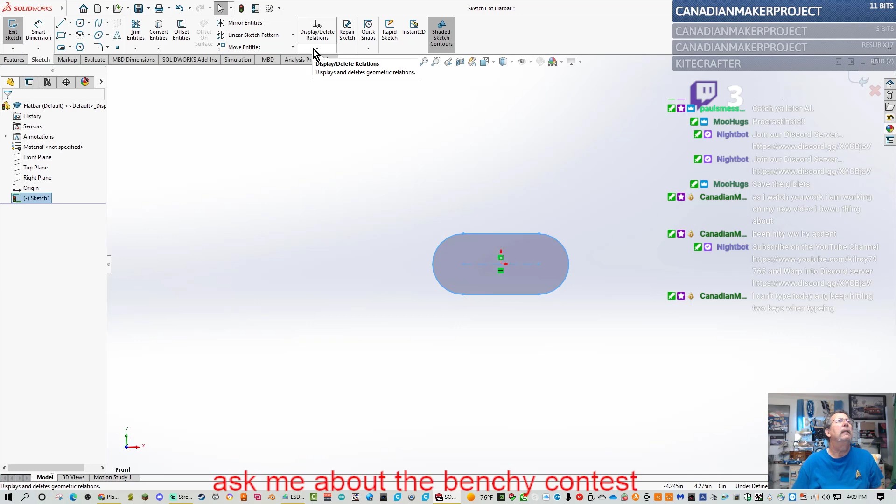Look at the dimension - oh, still trying to click. No wonder. Very interesting. Again, trying to figure out which way to go with this.

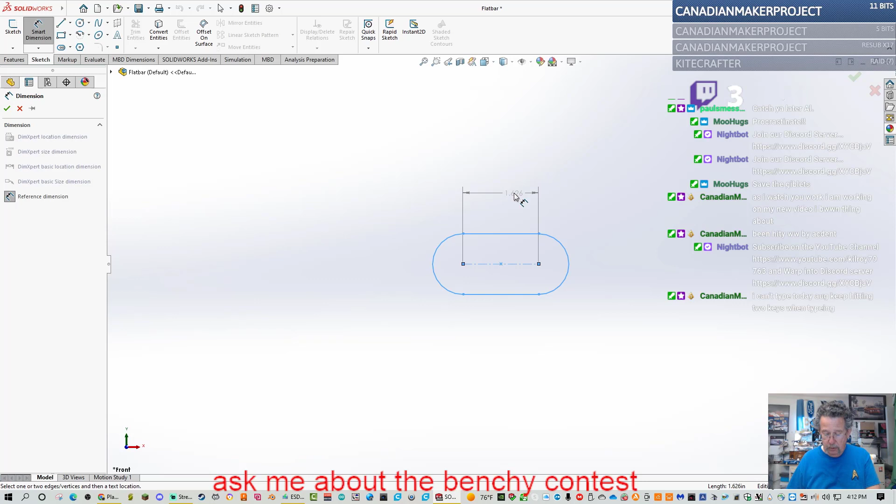We're still clicking the horizontal center line. Click the horizontal position above. Okay, and modify box.

Come the modify boxes - interesting. See, I can't change that value here.

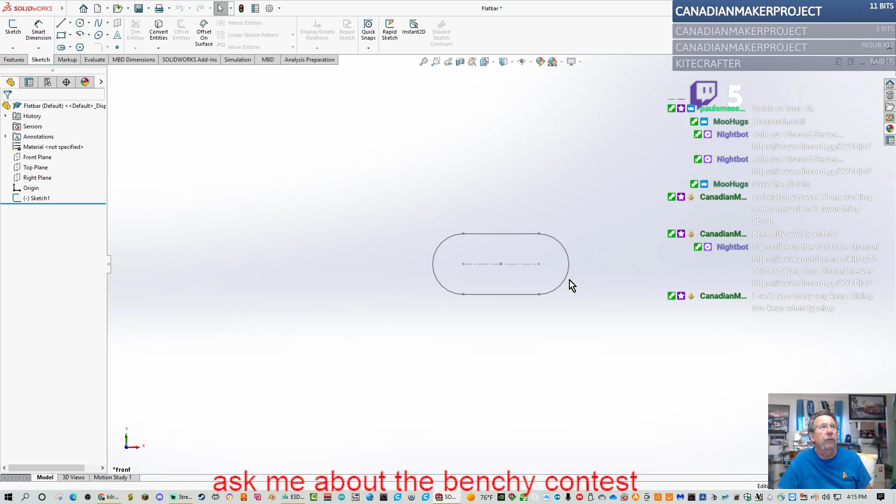Control Z, Control Z, Control Z, Control Z, Control Z, and that's as far as we can go. Edit sketch - okay, let's go back and edit sketch.

Click the position above the horizontal line. I'm going to have to start this over again. Smart dimension tool. Click the horizontal center line.

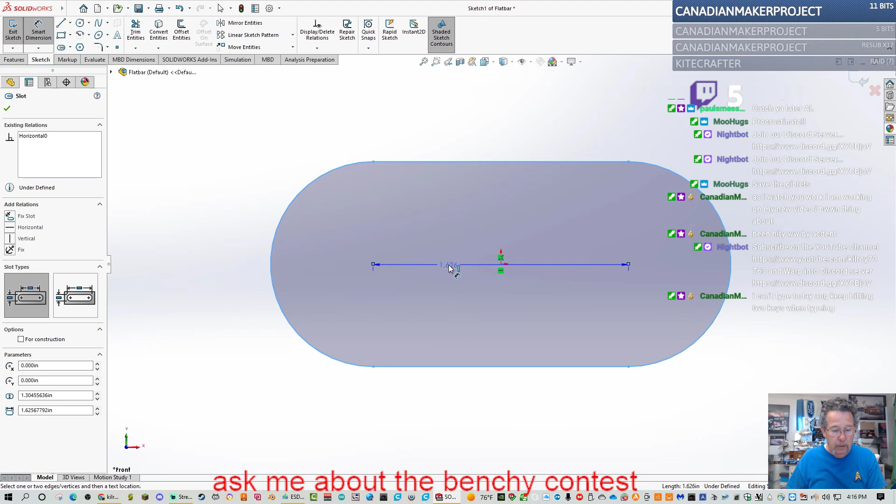Click the position above the top horizontal line in the graph. Okay, I must have double clicked instead of just clicking, that's why it threw me off. So click the green check mark, click the right arc of the flat bar. Okay, click position diagonal to the right.

Okay, go. Enter 250. Yeah, see, I need to be slower, right? 0.250.

Yeah, but that's the thing, and that's why I'm doing this, and hopefully somebody else will learn too. I mean, I'm learning. I'm a student in this class, not an instructor.

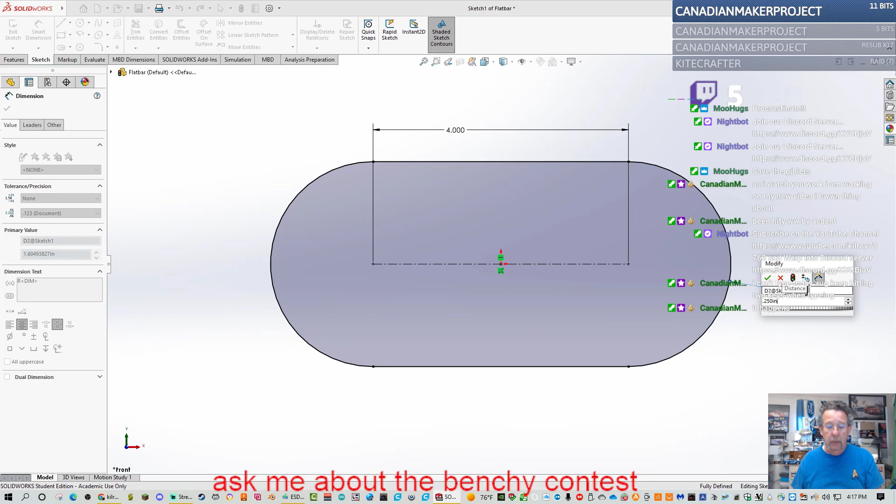Okay, so click the green bar. Actually, that's how it's supposed to look like because it's long, right? All right, very good, very good.

Oh yeah, definitely. Everything you learn helps you, I think, with everything else, to be honest with you.

So fully define all sketches in the model. However, there are times when it is not practical, generally when using a spline tool to create a freeform shape. Extrude the sketch to create a base model. Extrude, basically click the extrude boss, which is right here. Here's extrude boss base from the features bar. Enter, wait.

Enter. What are we going to put here? 0.90 inches, excuse me, for depth, and accept the default condition.

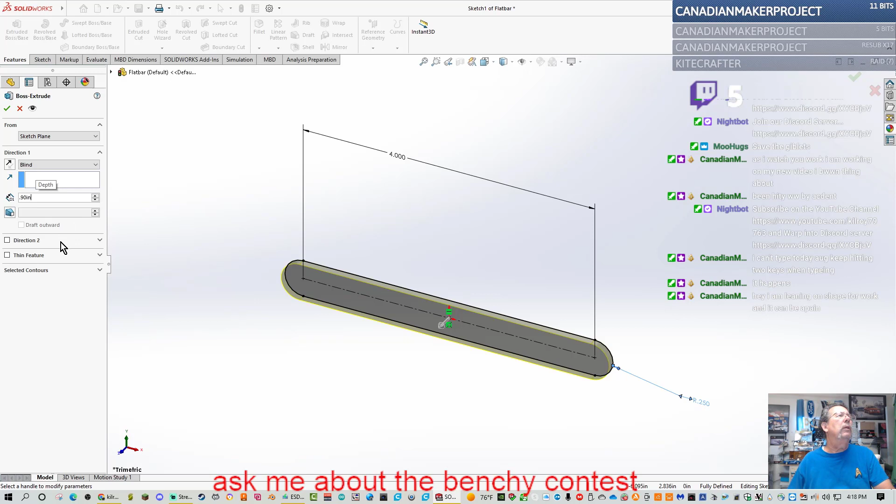Direction line, yep, that's where it goes. I was just double checking. So then click the check mark. That gives us that. Man, I bet that's messed up, right?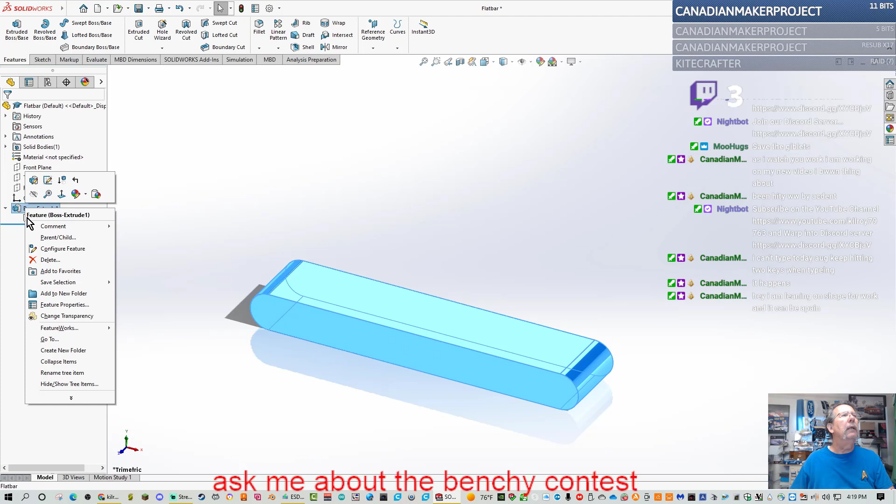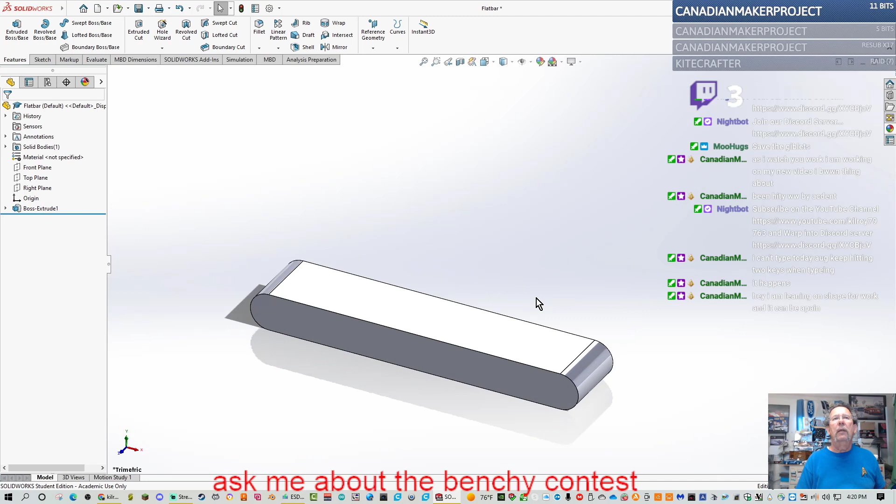What parent child feature? Let's go to... Yeah, what I did is I went too fast again. No. Well, that's the previous one before it, right?

Let's select... There's our extrude. Is it 0.9 inches? Oh, it's 0.09, right? Yeah, 0.09. That makes it thinner. Yeah, I was kind of wondering about that.

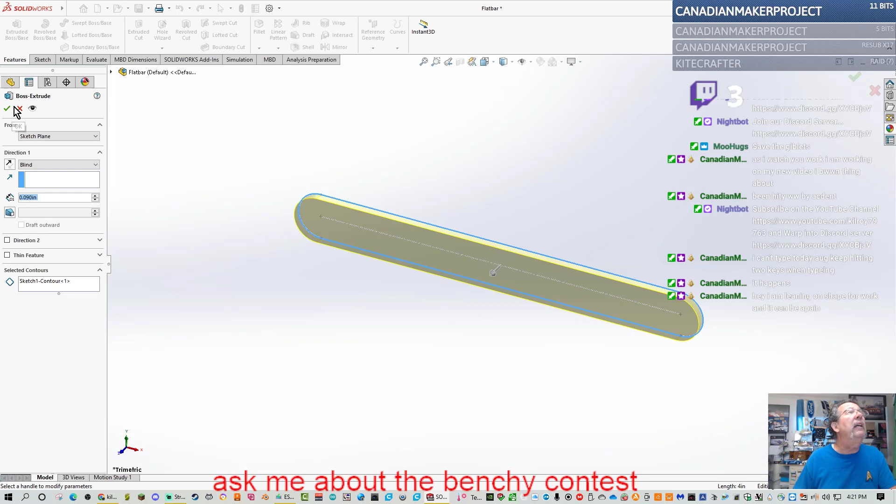Fit the model to the graphics by hitting F. Okay, 0.09. Okay, so we got that there for the model graphics window. I guess click that little green check box, check mark. All right, there it is.

Fit the model to the graphics window by pressing F. Okay, that's as far as it goes. Save the flat bar part. Let's go save as.

How's this one? Save... flat bar, that's what it is, right? Save the flat bar part.

All right, so we got this little bar, right? I mean, that's what flat bar is, right? So, flat bar extrude cut feature. So now we're going to cut into it.

So right click on the front face of the boss, which is this one. Sure, I'm not... oh wait, no, we still have to dimension this thing. Okay, so let me make sure.

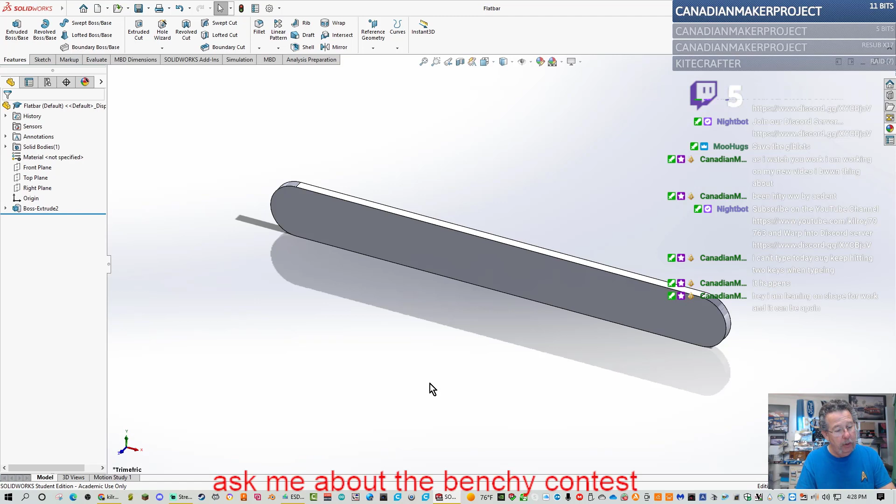Yeah, we're there. Okay, so flat bar extrude cut feature. So right click on the front face, yes, right click on the front face of the extrude boss feature graphics. This is a sketch plane. Boss extrude one is highlighted, and it is in the feature manager. Actually, there's a second extrude, I think, because I did it again.

Click sketch from the Context, which is right there. Toolbar is illustrated, display the front, so it goes to front. Okay, oh no, it says to display show the front orientation, which is this one here, right? Click front and the heads up. Yep, there it is, we have it there.

Click hidden lines removed, which is over hidden lines removed right there. Okay.

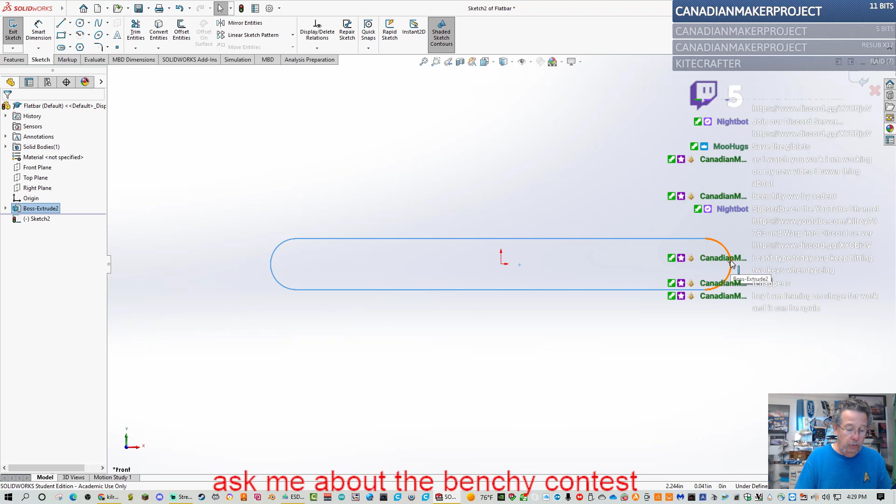The process of placing the mouse pointer over an existing arc to locate its center point is called the wake up. So when you go like this, see how it wakes up? Kind of shows it, right? So wake up the center point, which is right there.

Now we're going to click this. We're on the center point, right? We're waking up the center point, but it looks like they're doing the left one. Yes, so click circle sketch tool from the toolbar. The circle property manager displays.

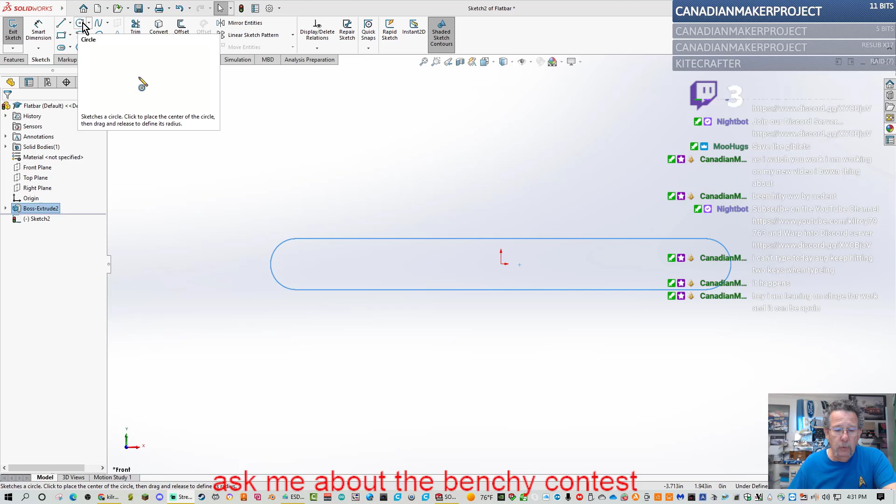Place the mouse pointer over the left arc, do not click. Yeah, the center point of the slot arc is displayed. Click the center point of the arc. So basically what it's saying is do a circle, come over here, place it on this right there. Okay, click the center point of the arc.

Let's back up a second. Okay, let's right click. Let's go to sketch, then we're going to go to circle, to arc, but it's the center point of the arc, which is right here. That's what we're wanting to click on. And then we're going to go to the right of that because we're trying to make a hole like that.

So we go over here, right? Click the smart dimension, click the circumference of a circle.

There it is. Click a position diagonally above and to the left. Click once. Now we put 0.190 inches, and then click the check mark.

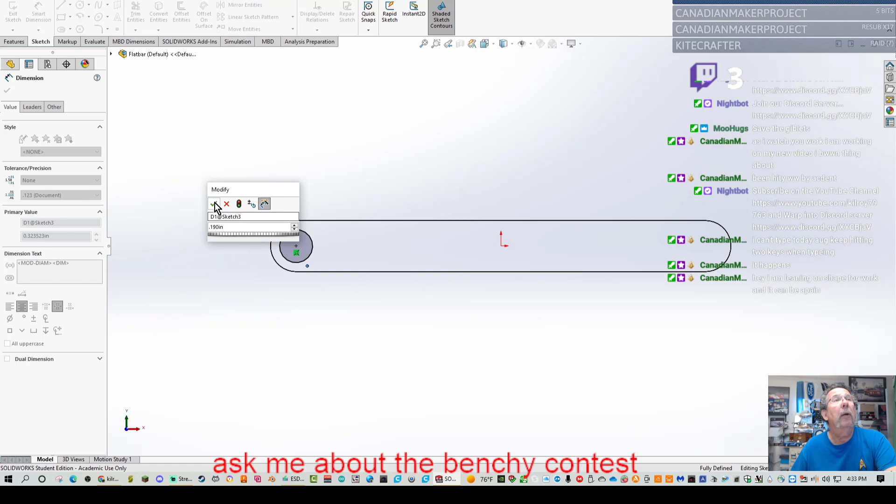All right, that'll work. Click the isometric view from the heads up. Isometric view is right here.

And that's this one, right? Is it? Yeah, that is isometric view. It even says, no, that's shaded with edges. This one here is isometric view, not the one shaded with edges. Oh no. Shaded, hidden, shaded with edges. Yeah, so shaded with edges from the heads up view.

Insert an extruded cut feature. Click the Features tab. I think it was just showing us, right? Because we're still in this mode. Oh yeah.

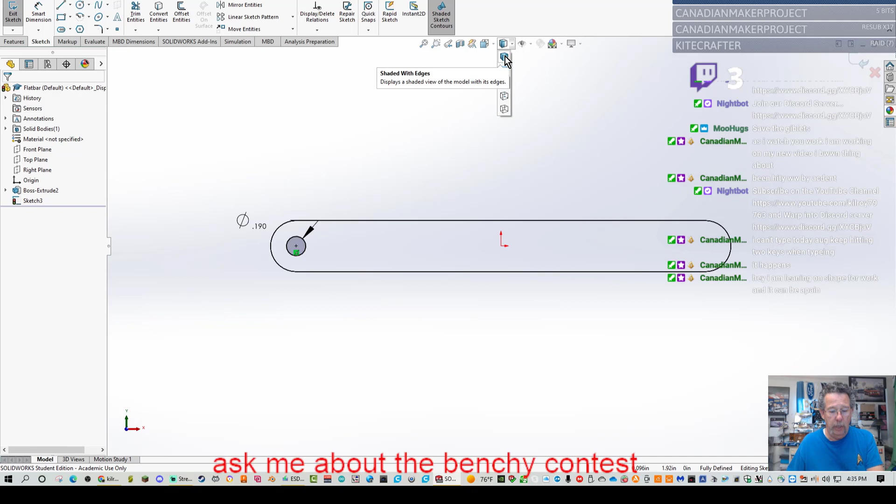Now we can go ahead and call these functions. But it is wanting shaded with edges. Remember, we can just rotate this thing however we want, right? Just like that. But we can also go here and then go to the front, right there. There's the front. And then, for instance, is that the one there? Yeah, that one puts us in the isometric, which is how it is right now.

Very good. Okay, so now click the Features tab, the Command Manager. Features, Command Manager, click Extruded Cut right there. From the Extruded Cut toolbar, the Cut Extrude Property Manager is displayed, right there.

Select Through All. Through All goes through all. For end condition in direction 1, the direction arrows point to the back, accept default conditions. Click OK from the Extrude Manager. So, giving it the okie dokie. There we go, and click Save.

Save the flat part bar. So let's just click Save, right? Control S. This point...

So think design intent. When do you use various end conditions? What are you trying to do with the design? How does the component fit into the assembly? Those are good questions to think about.

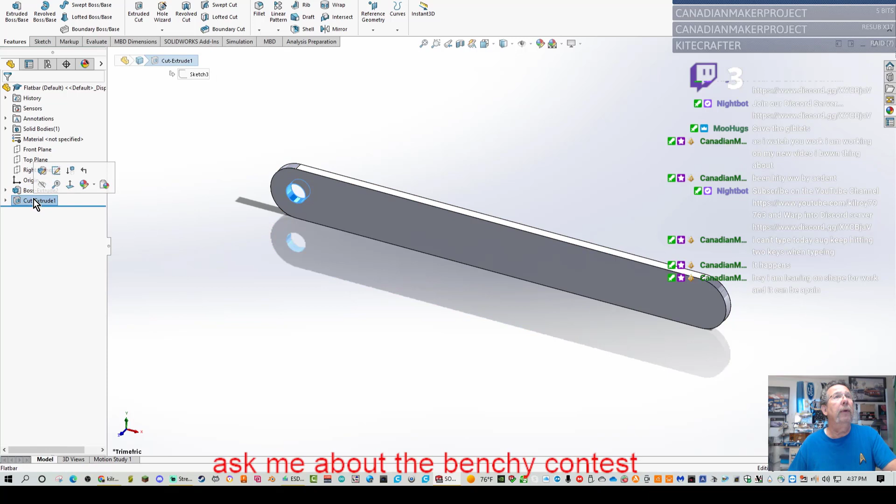The blue cut extrude icon indicates the feature is selected. Select features by clicking their icons in the feature manager. See, that means that's selected. And see, here's the cut through, and here's the boss extrude. I think that's what they're trying to say, that it changes like that.

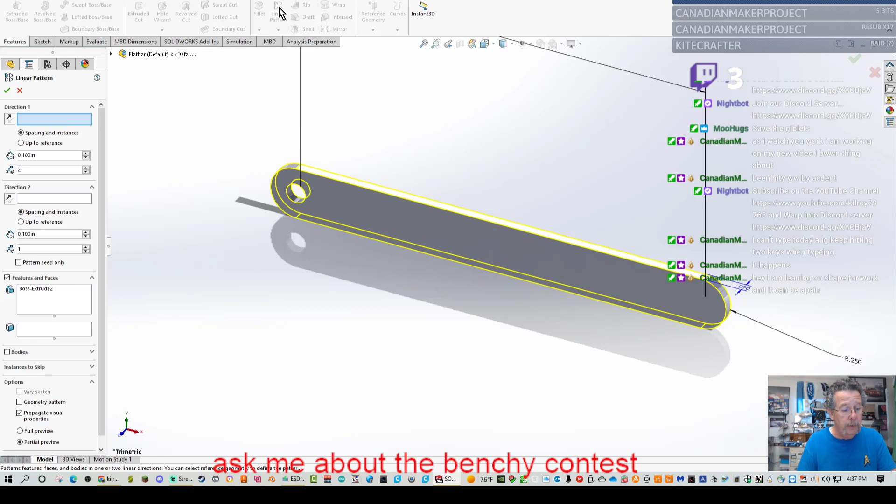So click Linear Pattern tool from the Features toolbar. Linear Pattern right here. Okay, now click the Linear Pattern toolbox. The Linear Pattern Property Manager is displayed. Cut Extrude 1 is displayed in the features. Extrude 1, there we go. Edge 1 is displayed. Okay, that's what we need to do, right?

Enter 0.5 inches for spacing. Okay, for spacing, and enter 9 for the number. Beautiful, 9 for the number.

The direction arrow points in the right direction. Click reverse? What, direction arrow points to the right. Click the reverse direction button if required. In other words, what they're saying is if it's going the other way around, the direction. I'm not certain what the direction is, but okay.

Check geometry pattern from the... yeah, click the reverse direction, both directions. But what it's saying is do this geometry pattern. Click geometry pattern. Okay.

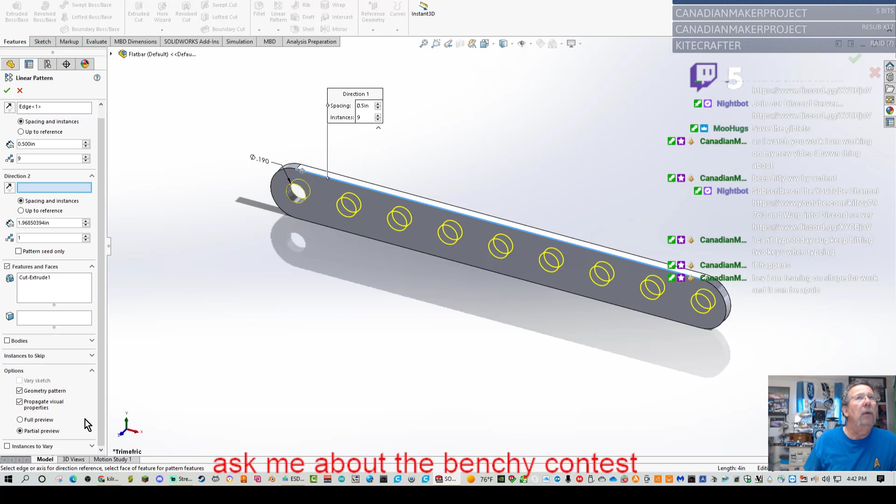Click OK. Linear Pattern Property Manager. Oh, yeah, I guess that's what it is. I right clicked because I didn't see the OK.

So save the flat bar part. Look at that, nice, we made a flat bar. Let's just save it. Okay, click Windows, close all. Okay.

So right now the linkage assembly is done. The collar's done, the axle's done, the flat bar's done. So the linkage assembly consists of, like I said, the axle, the shaft collar, and the flat bar, and the cylinder subassembly, which I haven't done.

So let's see, mate types. Mates reflect the physical behavior of the property and the mates. So there's standard mates, coincident mates, parallel mates, perpendicular mates, tangent mates. In other words, that's when one part goes onto another, like for instance, the bar would maybe be mated onto that round thing, whatever it was.